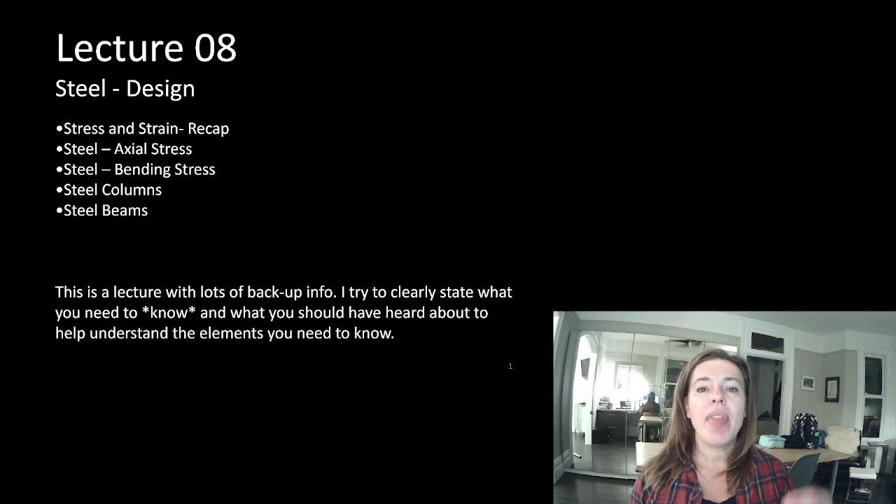It's understanding how those charts exist, or what they're telling you, that is the knowledge. But I don't want to make you do the math, because for every little number on these pages and pages of charts there are pages of calculations. I don't want you to have to do pages of calculations to get an answer. So I have a compromise: I'll do all the hard work for you. You'll listen, try to get a general feel of what I'm talking about, and then I'll let you use the charts. But I need you to at least try to focus on getting a feel for what I'm saying. So you don't have to do too much work in this lecture, but I want you to pay attention to what I'm saying.

By the end of today's lecture, we'll have answers. It'll only be for steel, but we will know if we have a properly designed member that works for our loads. Do we have a member that has a reduced capacity greater than the factored load applied to the element?

Which is exciting — you're going to be able to do the job of an engineer now. You'll be able to say something works. Last week we learned sizing guidelines, which means it's probably going to be pretty close to the answer, but we'll see towards the end of the lecture that it's a good place to start. We will have drawn something on the drawings that leaves us hopefully a buffer, but what we don't want is to find out that we actually need a bigger member than we gave allowance for on the drawings.

Hold on a second, sorry about that. We have the weirdest house with odd mirrors that show up in different spots. You just saw Dave come back from his run in his sweaty running gear, so I paused it so the poor man could get stuff out of his closet, which is the front foyer of the addition of our house, because it's a bonkers weird house. The weird window you can see in front of me is actually the original house's main part looking into the addition, so there are weird optical illusions in this house all the time.

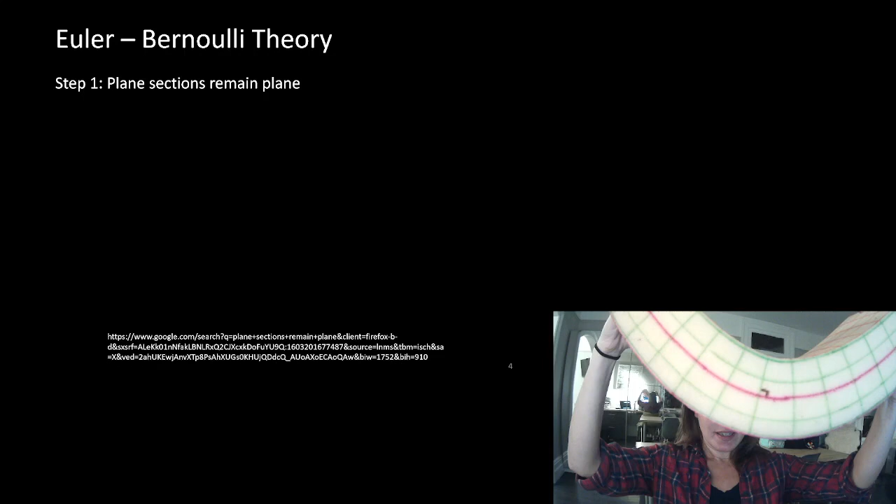Okay, so we've got our member here, and when we bend it, you can see that these lines stay straight. They don't curve. This line curves, but this line didn't. As we bent it, it compressed at the top and stretched at the bottom, but by the same amount. So that plane section remained straight, and relative to this neutral axis that is curving, it stayed at 90 degrees. How can that be?

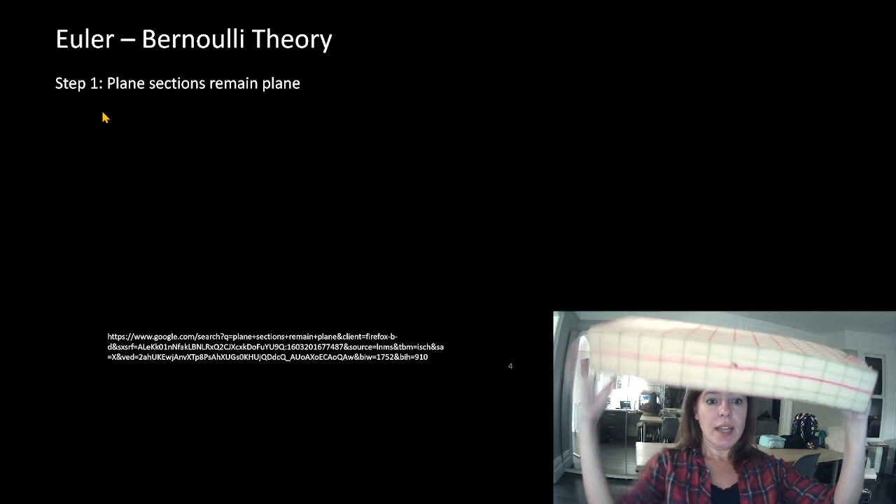How can all of these planes that are staying straight be perpendicular to a curved element? Well, essentially we're turning it into a circle. At any one of those infinitesimal microscopic plane intersections to this neutral axis, we still have 90 degrees. I know, it seems crazy, but this is where calculus comes into play.

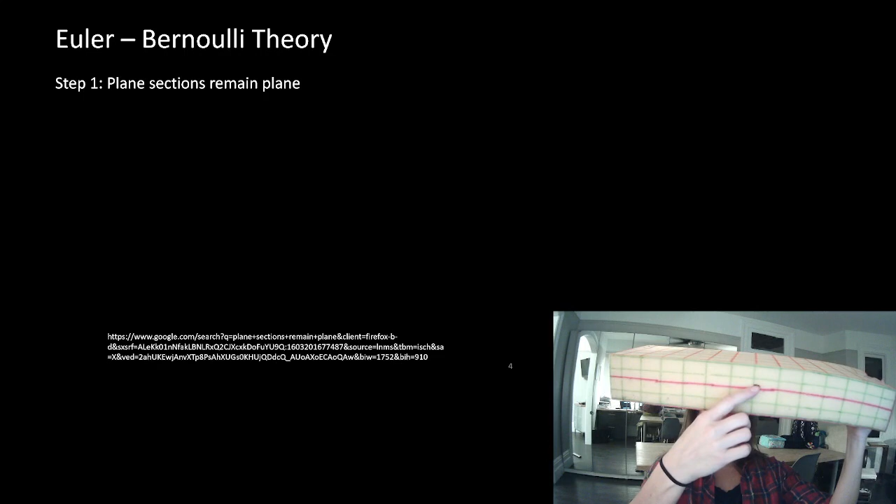We are talking about one infinitesimal plane. We're not talking about the whole length of the neutral axis, just that one plane. You can see when we bend this, the 90 degrees stays the same. It distorts a little bit because this line is moving, but if I could draw my 90 degree mark even smaller, we would see that it wouldn't distort.

So, premise number 1: plane sections remain plane. That 90 degrees stays the same. Here's our neutral axis, here's our plane section, and that stays at 90 degrees. For beam-like elements, transverse cross-sections perpendicular to the neutral axis remain plane and perpendicular to the neutral axis. We keep it at 90 degrees.

Step 2: for a plane section to remain plane, the strain must be varying linearly with the distance from the neutral axis. So, if this is bending, we know that it squashed here and stretched here, but stayed at 90 degrees to the neutral axis.

Coffee? I would absolutely adore a coffee. Thank you. I forgot to turn the dishwasher on last night. No.

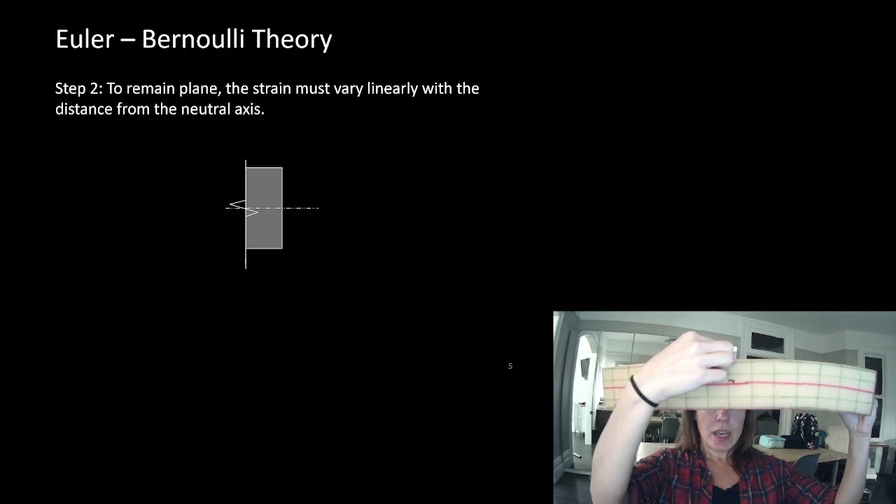So if we're squashing here and stretching here, but staying at 90 degrees to the neutral axis, we're getting some sort of movement here—compression here and stretching here. We know that we can quantify that as strain. We knew where it was originally, and we can measure how far it's moved. We're saying that the strain is varying linearly as you get away from the neutral axis. So the amount it's squashing goes from 0 to some big amount, and the amount it's stretching goes from 0 to some big amount, and that increase is linear.

So let's look at that. We have our maximum strain here and strain here.

Remember, it didn't matter if it was positive or negative - it was how much it deformed divided by its original position. So we have some amount of strain here and some amount there. We know that at 90 degrees, we have no strain right here. So that means we have a straight line for the strain.

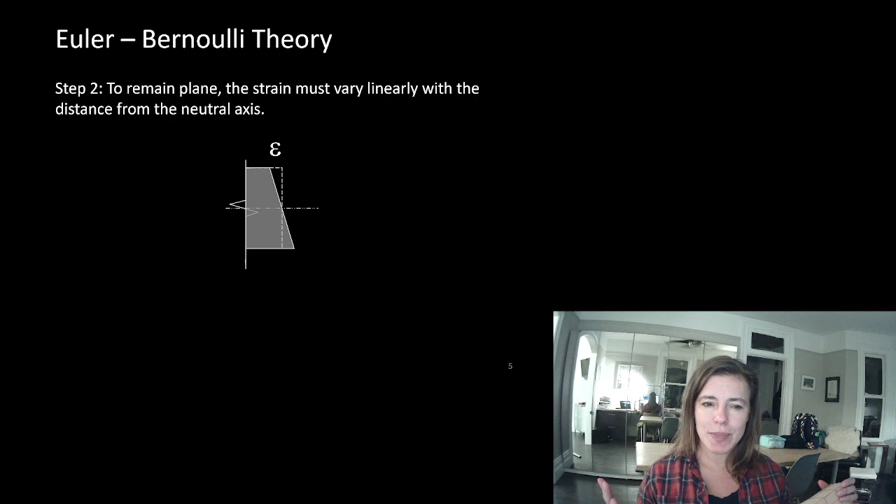Does strain have a relationship to anything else? Yes, especially for steel - it has a great relationship to stress. So we can measure the strain visibly, and then calculate the stress, because the relationship between stress and strain is linear through the modulus of elasticity. So if plane sections remain plane, the strain varies linearly, and since stress and strain are linearly related, the relationship of stress away from the neutral axis is also linear.

So as we bend this, we get maximum stress here where it squashes and stretches. We have the same stress top and bottom, varying linearly with zero stress at the neutral axis. This was our strain, and this is our stress - maximum stress here and here, and no stress right here.

If what we care about is not making this part of the element fail, we don't want to go over our reduced capacity. We want to make sure this part never hits 350 MPa - remember, that's the yield stress of steel. If it goes beyond 350 MPa, we'll have permanent deformation, and we don't want that. We don't like permanent deformation.

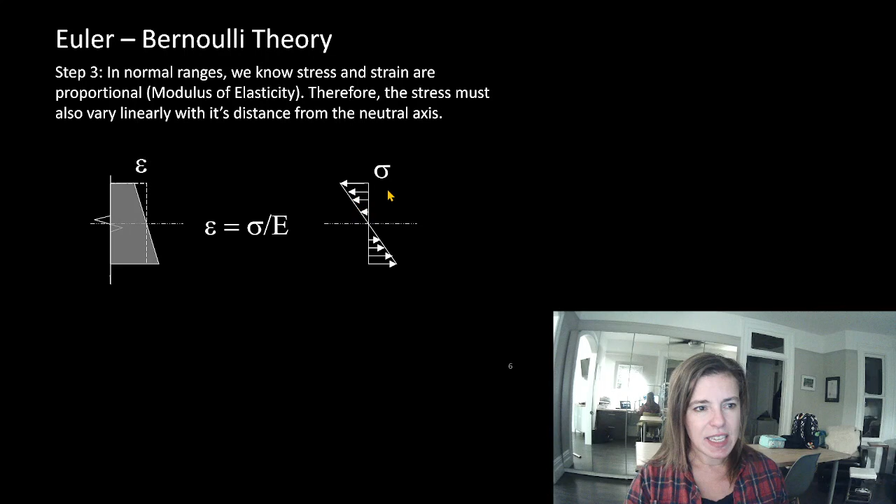Now, if we know this is the stress profile and we want this part not to hit its maximum, maybe we can do something with this. You can see here I've just taken this and redrawn it with a triangle - it's still the same triangle, I've just drawn it on the other side.

So the Euler-Bernoulli theory - if we look at a rectangle in bending, just as it starts to yield at the extreme fibers, we would have a stress profile that looks like this. This is our element that we're bending. This is what's on the face of this plane right here, and we're saying we're going to bend this object and cut a plane through here.

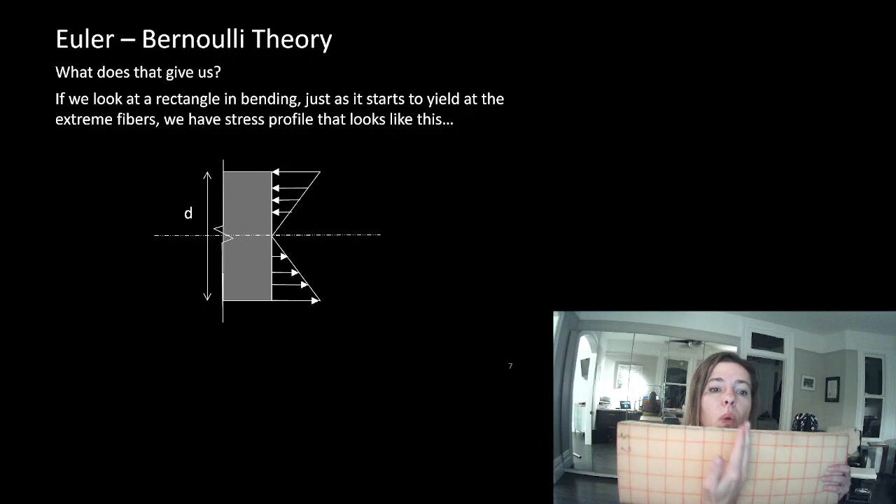This line right here is like we cut this beam and we're going to look at what's happening with the stress right here, just as if we started to bend it and are just about to reach the maximum loads at the top and bottom.

If you were in my graduate course, we would have to derive this process where we look at what that stress profile shape looks like. We sum the moments and forces on the top and bottom of the neutral axis, and we develop a moment equation. Essentially, what it says...

is that we have this equation with B and D in it. B is the width of our element and D is the depth of our element, and it tells us that the moment is equal to our stress times B D squared divided by 6.

Well, B and D are 100% dependent on the shape of our cross-section. So what does it look like in that cross-sectional profile? We're saying B times D squared is our shape property to solve for moment. So moment equals stress times some shape property - we'll use S as a placeholder, a bending shape property. For a rectangle, in elastic bending, that is BD squared divided by 6.

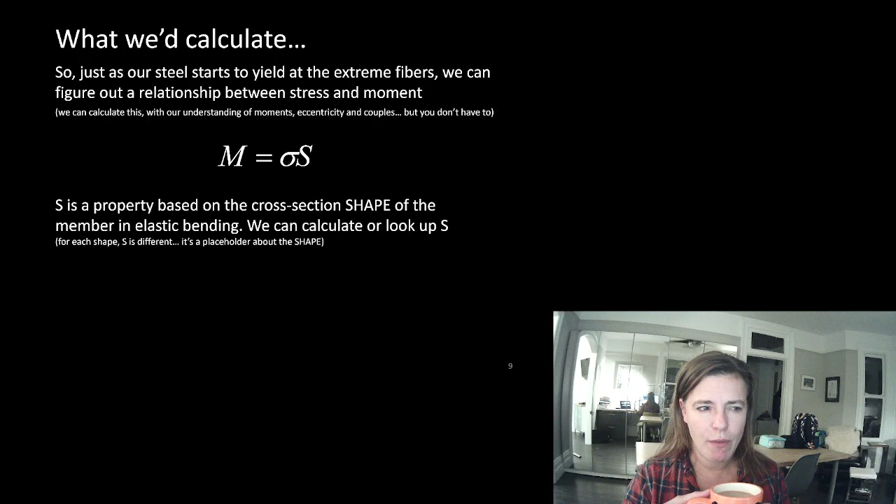That seems crazy - why would I let us go into plastic bending if we don't like permanent deformation? All right, let's think about that now.

But the cool thing here is we know that we don't want this to go over 350 MPa. Moment is dependent on the loads on the element, and S is a shape property of our section. And we're picking our section.

So we could possibly figure out what capacity this element has. We know its shape, which means we can figure out its shape property, and we know what the maximum steel capacity is. That would give us the maximum moment capacity of our element. So if we knew what our factored load was, or our factored moment, if we put a reduction factor on this, we would know our reduced moment capacity, and we could tell if it was greater than our factored moment on the element.

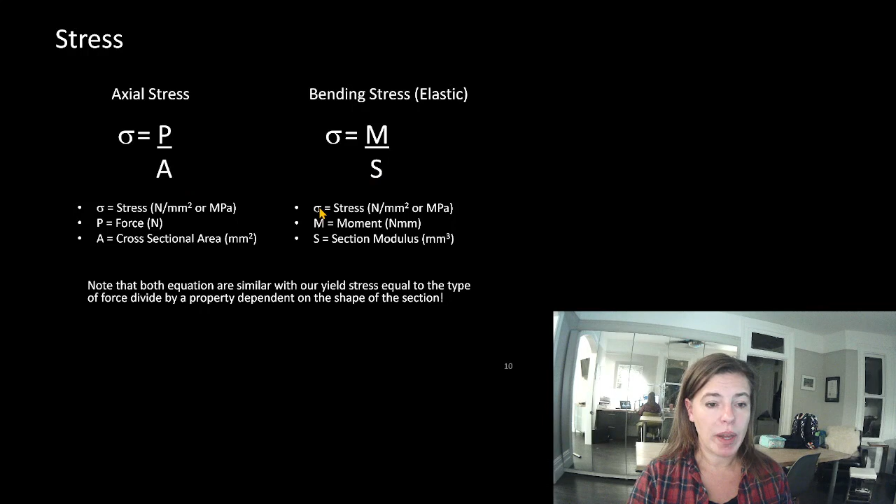Well, look at stress. Remember, we wrote stress as force divided by area? Well, we can rewrite that moment equation as stress equals moment divided by shape property S. They're the exact same. Stress, which we know for steel is 350 MPa for yielding. Force type, shape property. So both of these follow a very similar equation setup.

Okay, this one always throws people off because it really only applies to ductile members. I wouldn't even do it in this lecture, except it's the best place for it because we're talking about steel, but it isn't a thing that applies to our other materials. Concrete is brittle and wood is brittle. So this second part doesn't apply at all in the least bit to those materials.

We said that we want to limit the stress at the top and bottom fiber to just when it starts to yield. We'll let it go right to that point, but beyond that, we'll have permanent deformation, which is true. But do you remember in that stress strain curve, when you were getting permanent deformation, you weren't increasing the stress at all. What if just a little bit we allowed it to have some small amount of permanent deformation all the way until we got our maximum stress all the way down here?

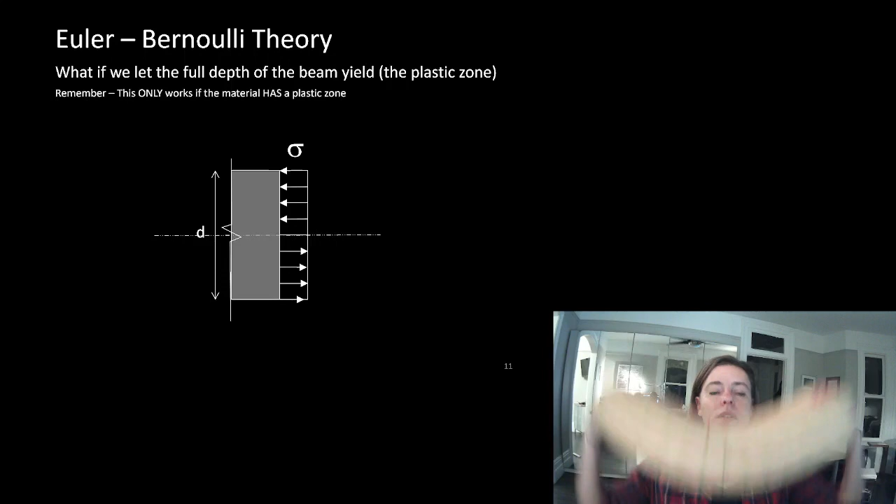So remember that thing, plane sections remain plane? Well, that's true until it starts to yield. Remember our stress strain curve looks different? So we're saying, okay, at the top and at the bottom, we'll allow some small amount of permanent deformation, and now we'll allow the stress, the maximum stress, to come all the way down to the neutral axis. Beyond that, and we definitely failed this member.

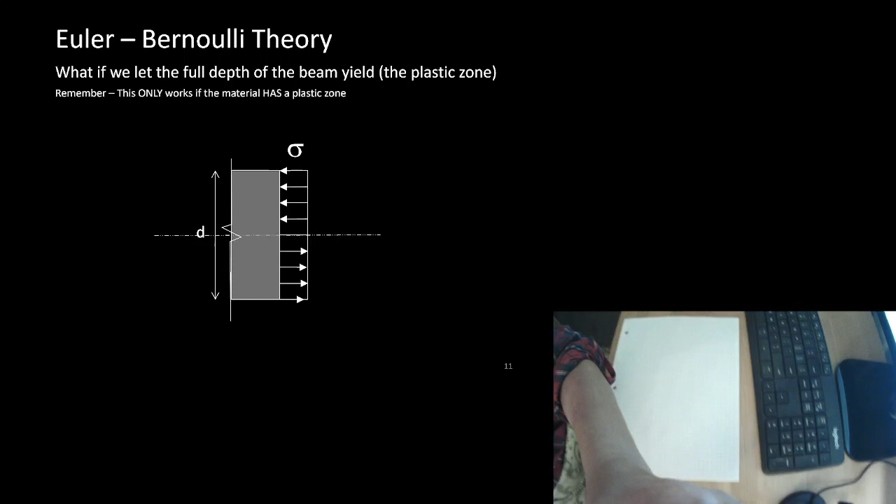But what we're saying, and when I'm doing this in real time, I'll often redraw this stress profile. Let me, it's dark in here, so I don't know how well this will show up. What I often do in my grad course is when we do this, I draw the stress profile. I'm going to draw it on the other side just because I find people understand it better.

Okay, we're limiting this to our maximum stress, top and bottom. Well, we're going to say that we'll allow it to have some amount of permanent deformation. Maybe we come down like this a little bit. Oh, I went a bit further with that one. And then that becomes our linear elastic zone.

So right here, we're getting some permanent deformation, but we still have zero stress down here at the neutral axis. And then we say, okay, we'll let ourselves go even just a little bit farther, just the tiniest little bit. I just want to, sorry, I've been drawing those arrows backwards. I wasn't even thinking. These are going in opposite directions.

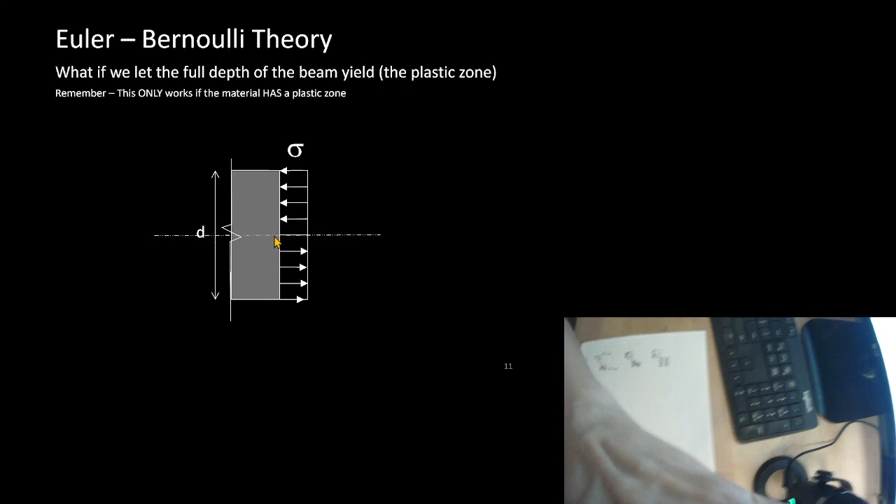We're going to let this now come just down to the neutral axis. So this is just a redrawing. That is just a redrawing of this. So we're letting our maximum stress come all the way down to the neutral axis. We don't want to go beyond that, or else we're going to have a lot of permanent deformation throughout the entire member. But we'll say we'll let just a tiny little bit of permanent deformation happen, just as we get that maximum stress or that yield stress down to our neutral axes.

So if we did the same thing I did before, that thing you don't have to do, where I look at what that stress profile looks like as a block, and I look at the internal forces and rewrite it as a force and a moment, because we know about couples, then I can go through and figure out that the moment equals the stress times the width, b, times the depth, d squared, but divided by 4.

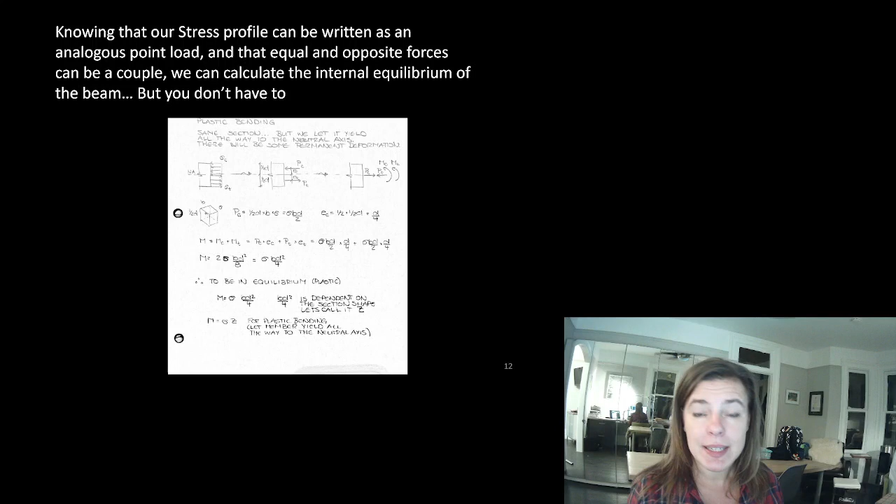So it's just a different shape property. Before we had S. Now if we let it yield down to the neutral axis, we say okay, we'll let it go past the extreme fiber, we can use a different shape property called Z. Z lets us get a little bit more out of our steel beams and columns because it has the ability to yield, and it has a very large plastic zone. Wood and concrete, we can't make use of Z because it doesn't exist. It has a brittle failure mode.

So both equations are still similar with our yield stress equal to the type of force divided by a property dependent on the shape of the section. This one just lets us make a little bit more use of the fact of our steel because we know it has a huge plastic zone, and we're only going to touch the tiniest little bit of it.

I thought I heard a kid, but I do not. It's the heat coming on.

There is another thing that we can calculate looking at this Euler-Bernoulli strain beam theory. Remember, I just briefly touched on strain simply because it allowed us to talk about stress because we knew those had a linear relationship. Well, if we talk about the strain itself, we know that this angle can be calculated based on how much strain we have here. With that, we can go through all kinds of stuff, which actually involves a double integration. Don't worry, not even close to what we're going to do. But I am going to tell you that it allows us to calculate what that angular strain is as a relationship to the moment. And that angular strain is moment divided by EI.

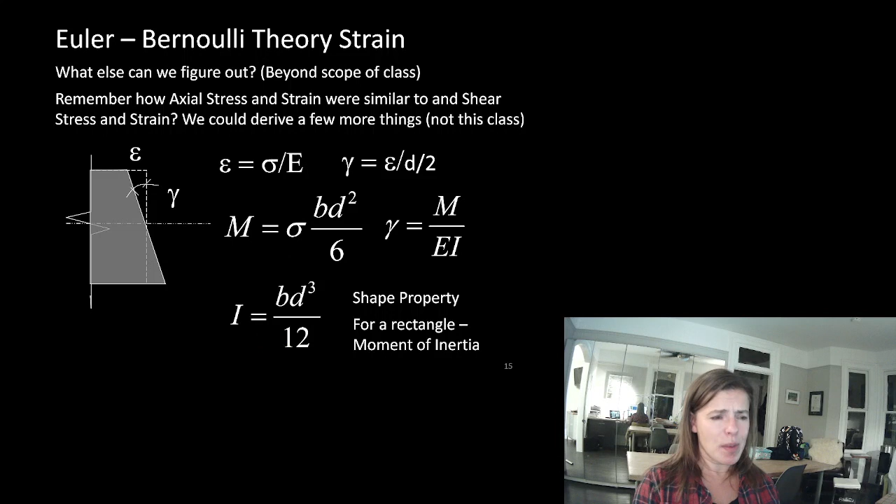All right, I'm just going to show you those slides that I said you don't have to worry about. Start with angular strain, we can integrate, we can get the rotation at any point, we can integrate again, and we can get deflection. Now, you do not have to do this - in no way am I even showing you the calculations for this. But the deflection of a beam, so if this is our beam and bending, and we've deflected it, the amount of deflection that we got there at the middle, the amount of this deflection right here is equal to...

...5 times W, which is our linear load on our beam. Now this is just for a simply supported beam with a uniformly distributed load on it. Do you remember way back when I said that was like the most common type of beam we'd ever seen? So W is our load, L is the length. Why they write length of beam in a lowercase for deflection when everything else in the world they write it as a capital has always bothered me. Don't you find that they always write deflection L as a lowercase l? So it kind of looks like it's not L. Anyway, this is the length of our beam to the power of 4, divided by 384 EI.

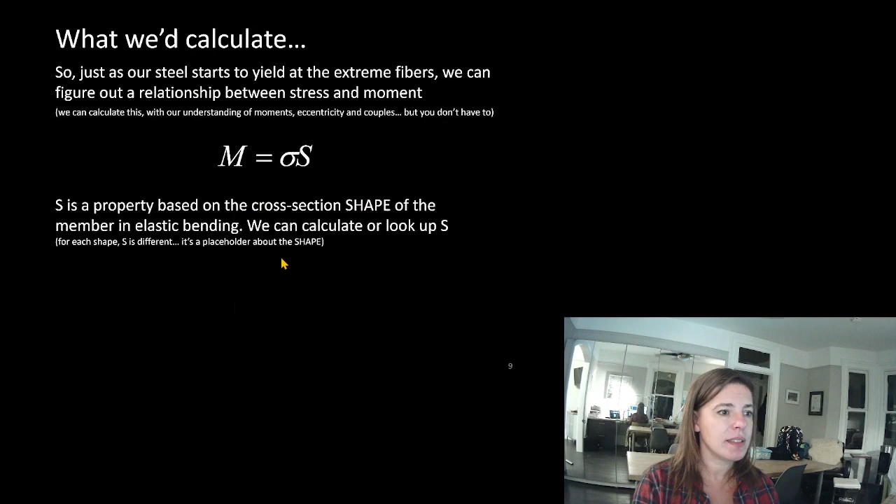So, do you remember axial strain could be delta L equals PL divided by EA? Remember that way back when we were talking about axial stresses and strains? When we knew that E equaled modulus of elasticity, let's go back here for a sec. Let's see how far back we have to go. Just want to bring you back to this slide. Remember, E equals stress divided by strain, stress equals force divided by area, strain equals change in length divided by original length. We could plug P/A in for stress, delta L divided by L for strain, and we could rearrange it, and we got delta L, where our change in length equals our force times our length divided by our modulus of elasticity divided by A.

A is a shape property. We don't talk about it that way very often, but A is a shape property. Let's come way back down.

Well, this is our axial strain, and this is our bending strain. This is our deflection at the midpoint of our simply supported beam. The delta L was axial force, so we're talking about deformation, force. It's just a particular, we're just writing it a slightly different way. Length, E, shape property. So even though they look very different, this one has a bunch of constants in it, they're really fundamentally coming from the same place, these two equations. Both talk about deformation, both have a load applied to them, both involve the length, both involve the modulus of elasticity, and then both involve a shape property of the member.

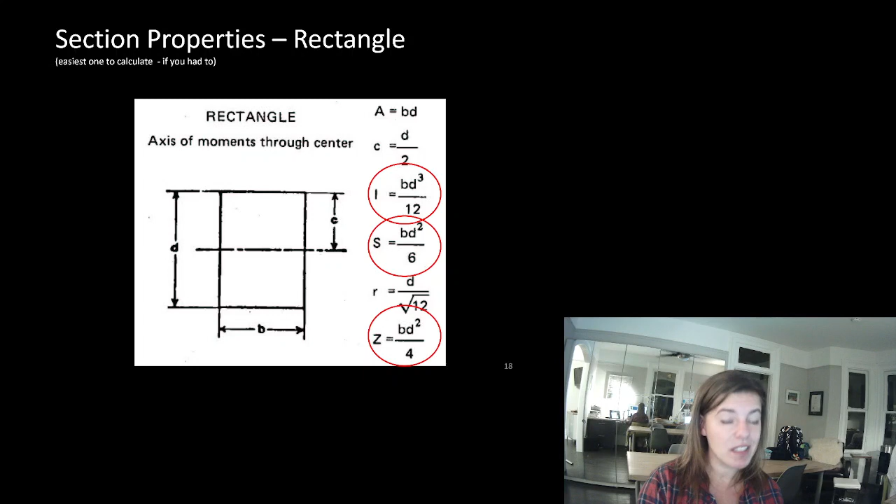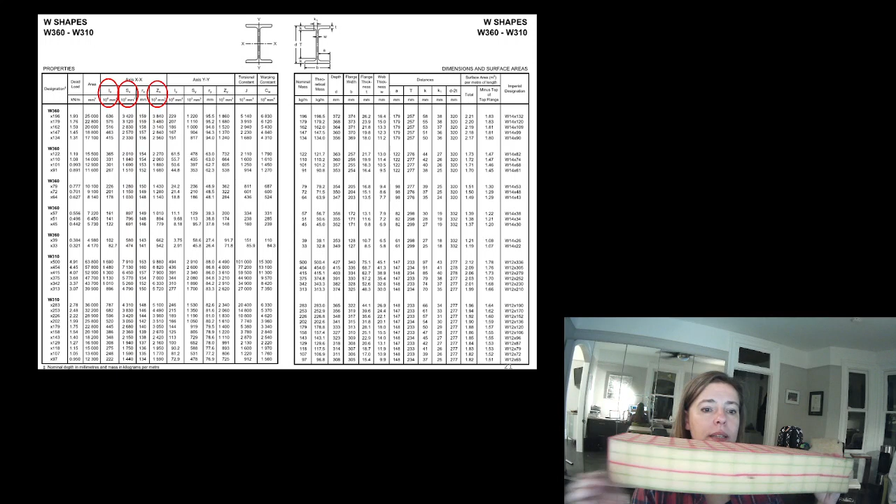So if this is my cross section, and in this one I've got B and D, if this is my beam in bending, you can see we're talking about moment about some axes here. We're saying we're talking about moment about this line in the element. It's internal axes like this, so we're talking about moment about this line. Remember, if we curled our thumbs, we're talking about it going around this x-axis.

If we had something, so this would be our strong axes bending. What if we had something bending sideways like that? Well, if we had something bending sideways, we might want to know those shape properties about this axis, because now we're talking about it bending in this direction.

So for that, we would want to talk about it spinning about this axis. Remember my thumb, this is the moment being applied to it, my thumb is the axis. They call this the internal y-axis of an element. So x-axis, y-axis. Bending in this direction, we're talking about the x-axis. Bending like this, we're talking about the y-axis.

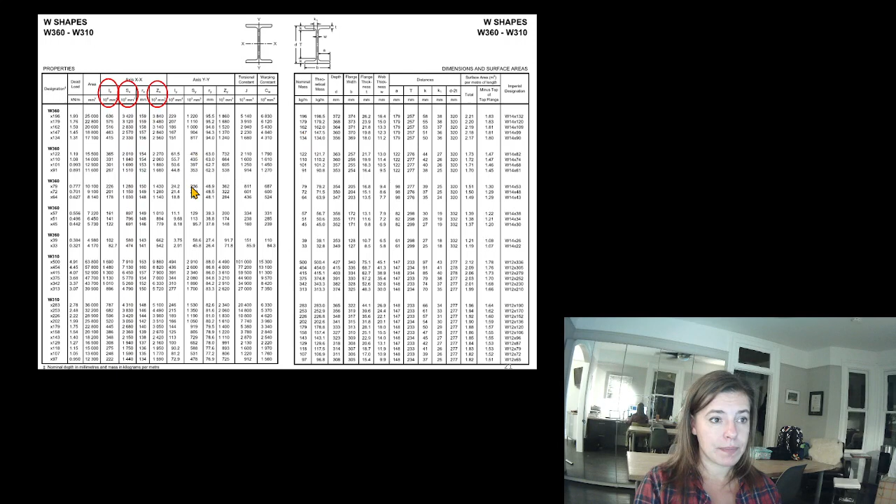Well, if you guys remember, we looked at those loading diagrams for different beams way back when. We had where you could calculate R and V and M. Well, they also had one for deflection, and within it, they had the shape property I.

You don't need to memorize it, you can look it up in the chart, but I tell you, I plug that into a calculator all the time. Even though I have fancy design software that does all kinds of them for me, sometimes it's easier to just plug it into my calculator and double check it.

You guys though have access to this diagram right here, so you know that you can calculate I or figure out I for any given shape. You can look it up. You know the length of the member is how long it is, and you know W is the load.

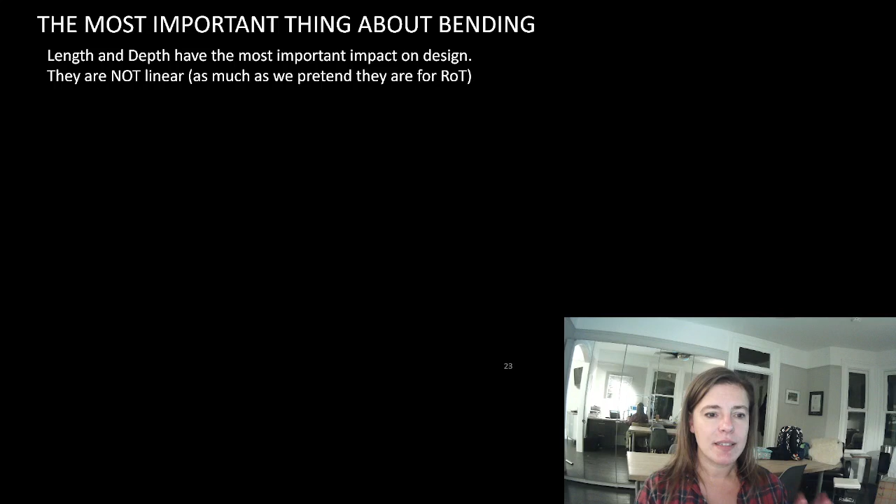And that is a linear relationship. Remember I said that's great if we're talking about a small range of narrow, normal applications. I said that this week we would find out that in truth they are not linearly related. This is what we have done. We have just talked about this.

So, length for the load, for the life safety, M equals WL squared divided by 8. That square is not linear. As something gets longer, there's more and more moment, and it is not a linear relationship to the load. So load is linear—double the load, double the moment. But double the length, you square the length's increase in the moment. So it's not a linear relationship.

Deflection: look at length written in the deflection equation. It's to the power of 4. It has a huge impact on deflection. So if you increase the length, it's not a linear impact on the deflection—it's a to-the-4th-power impact on deflection. So L squared for strength, L to the 4th for serviceability.

Depth. Now, I'm using the example of a rectangle in cross-section, but these constants tend to hold true no matter what. So BD squared divided by 6 for strength. B is the width, and it's linear. Depth of our cross-section is squared—it is not linear. So if you deepen your member, you don't have a linear increase in your section property. You have a squared impact on your section property.

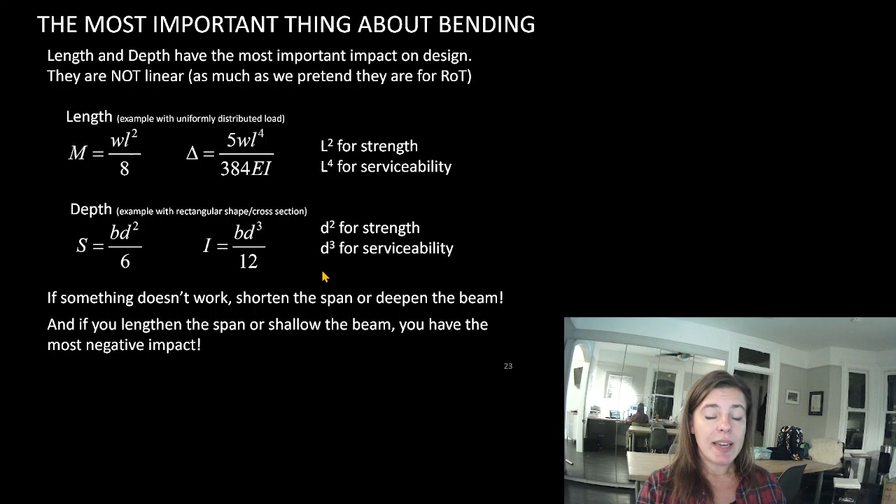Depth: if we have a beam that doesn't work, well, maybe we can't change the length—that's set, our grid lines are set. We could deepen our beam. And if it's overstressed by 2, we don't have to double the depth, because we have a squared increase in our capacity due to depth. So whether it's length or depth, we have an impact on strength and serviceability.

So remember our old friend, this equation. Let's jump to the next part. We want our reduced capacity to be greater than the factored load. If we see the subscript F, we're talking about factored, and if we see the subscript R, we know we have our reduced capacity. For serviceability, we're not going to do this, and we're not going to do this, because that's not about life safety—that's not strength.

We talked about our steel properties last week—let's brush them up a little bit. Fy is 350 if it's an HSS or a cold formed section, 345 if it's a hot rolled section. What's Fy? Fy is just that maximum yield stress on our stress-strain curve. If what we care about is not exceeding this limit, who cares if we're at 250? Great, it works—we're not going to check it against 250. We want to make sure we don't exceed these values. These are the values we care about. If we're less than that, we're fine—we're in a zone that works. If we go over these elements, that's when we have a problem.

I've talked a lot about reduction factors or reducing the capacity. Here are the steel reduction factors. For normal steel, whether we're talking about a column or a beam, we're going to reduce our capacity by 10%—we're going to make it only 90% of its capacity. Really what we're saying is we're going to reduce 350 or 345 by 10%; we're only going to allow ourselves to use 90% of these capacities. Rebar, bolts, shear connectors and anchor rods have some slightly different values, but this is really the only one we're going to talk about right now. When we talk about concrete in a few weeks, we'll talk about rebar.

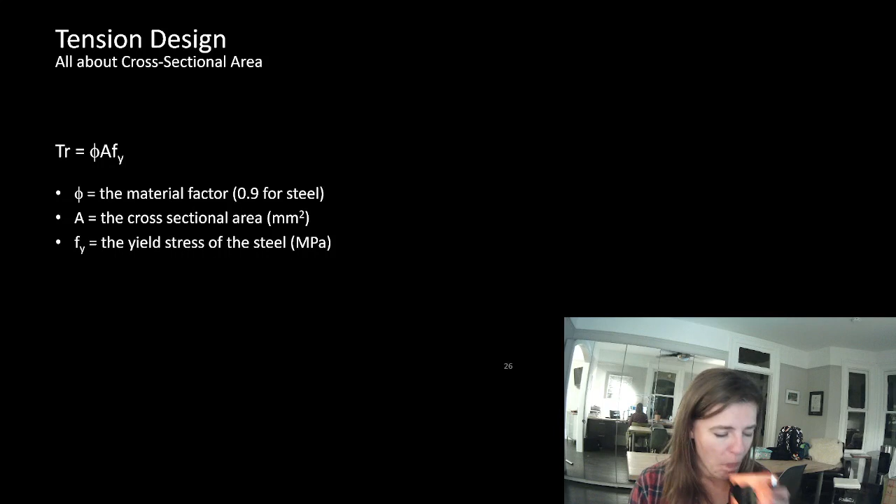Okay, let's actually do some design now. We're ready to do a calculation and start thinking if these things work or not. I'm going to show you how to use a chart to do the work for you, but we should talk about where these charts come from.

Tension is pretty easy. Steel behaves nicely in tension, and we don't see weird things start to happen. I'll talk about those weird things when I talk about compression in a second.

Tension design is all about the cross-sectional area. TR, the reduced tensile capacity—this R means I'm talking about a reduced capacity, so there's my reduction factor. I get to put my little subscript R here because I have this reduction factor in it. TR equals our reduction factor times the cross-sectional area times Fy. Remember, Fy is the maximum stress I want to let my object see.

We know for steel that we want to reduce the capacity by 10%, only 90% of it, and we know A is the cross-sectional area. So for any given member, we can calculate the reduced tensile capacity of it.

Compression's harder. Let's talk about why. I've got this beautiful column here. If I stretch on it, you can see that there's some deformation, and it's easy to understand that if I had bigger hands or I could apply the load better, you could see that it would be evenly distributed across the cross-sectional area of a column.

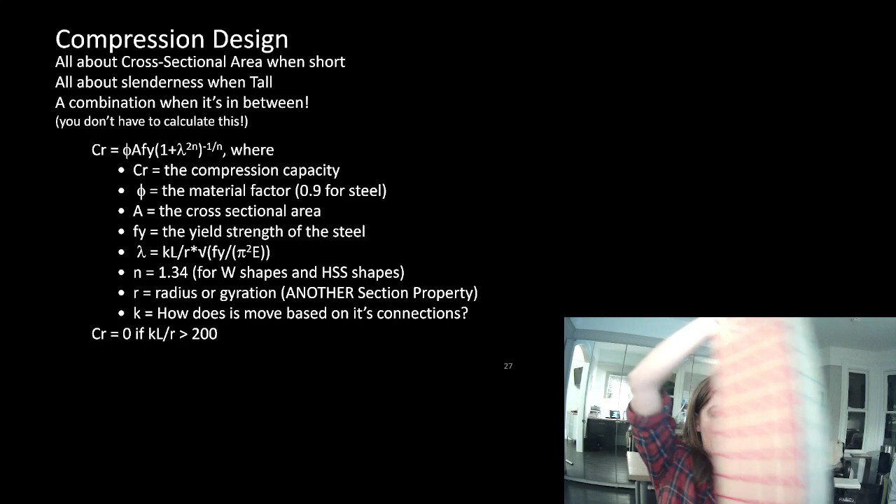Okay, what happens when I try to squash this column? That doesn't seem like it has anything to do with how strong the material is, because it doesn't. It has to do with its slenderness, or the fact that it wants to buckle. So a column isn't just dependent on its cross-sectional area—it is dependent on its ratio of length to cross-sectional area.

And there's two directions that this could happen. Now it's a lot harder to do it in the other direction. So compression design has two components to it: is the material strong enough to take that compression load? No problem, we know that. I just want to block all this out. We're left with reduction factor, A, Fy.

So Cr is the reduced compression capacity of our element. If you ignore whatever this weird stuff is, this looks exactly like our tensile capacity—the equations look the same. But that just has to do with the material strength of our element.

We need to think about how we talk about buckling. Because look at this—if I make this really short, it doesn't try to buckle anymore, it just tries to squash. And that is this part of the equation. Make it really short and it's trying to squash. Great, we've got that right there. We know that's all about the cross-sectional area.

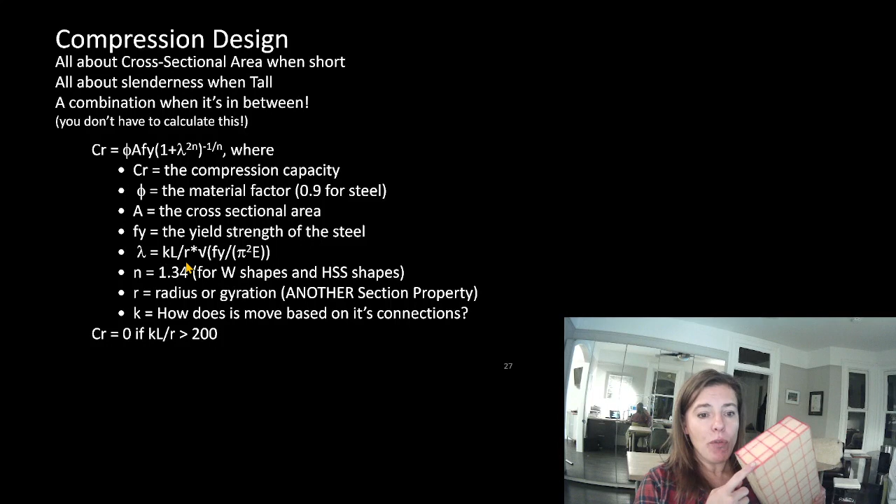I know, a pain in the butt. Well, R is another section property—if you looked at those steel shape properties, we had something called R in there as well. We're not going to worry about it, you're not going to calculate it, but this is all about its ratio of length to its cross-sectional area, essentially. R is really saying how far away is the worst point from the center of our column, because that's going to tell us its ability to resist buckling.

So lambda is really just this ratio of how long is it to how big is our element. Really, you can call this your slenderness ratio if you'd like.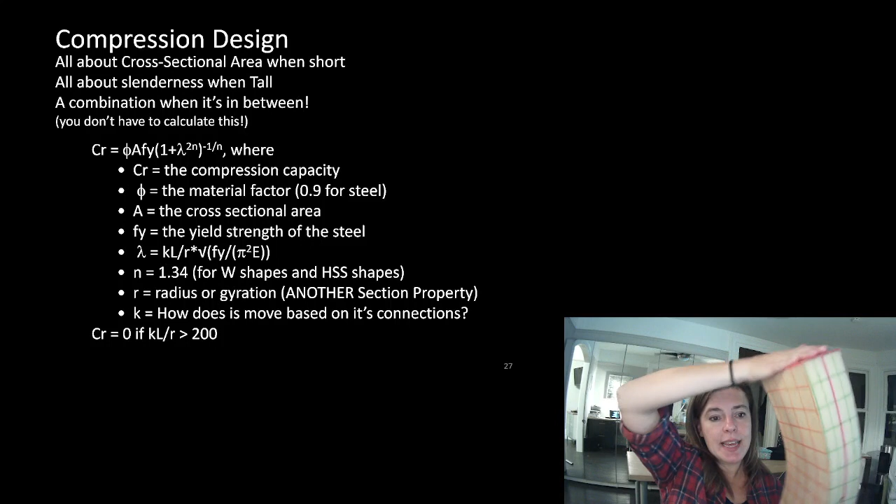K is really just saying what our member looks like, or how it's trying to buckle. So this, you can see, is buckling by allowing it to rotate at the edge. See how this flat plane has rotated?

It doesn't stay at 90 degrees to the load being applied, and we get this buckling shape. What if I moment connected the top and the bottom, but still tried to put that load on it? Look at the shape of how it's buckling now. You can see the top, it's hard because it's a foam block, but the top is more perpendicular to my hand, as is the bottom. It's actually hurting my arms to do this because it's a lot harder to buckle it, because by moment connecting it, it is similar to having a shorter length member.

So K is how it moves based on its connections, or its kind of connection factor, if you want to think of it that way.

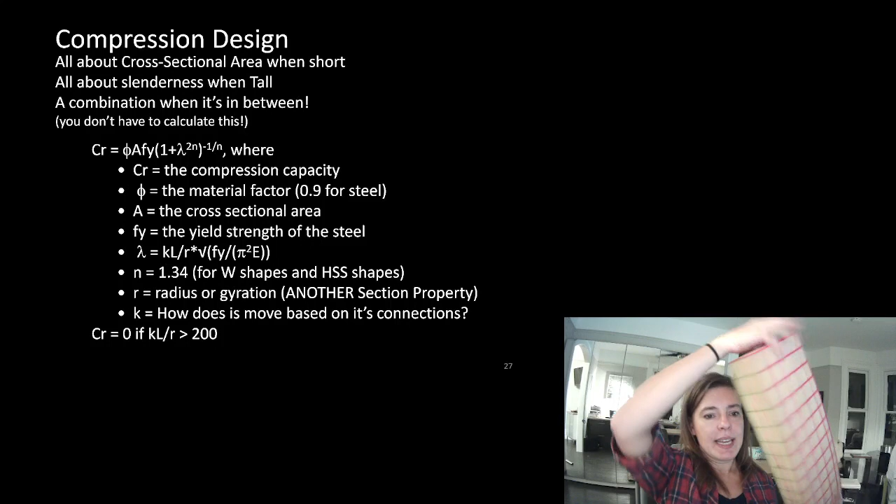We also say that we don't care what load it can take, even if it says it doesn't buckle. If this was several of these stacked high, it could take some amount of load before it buckled. But when it gets so slender relative to its height, we say the smallest load could make that buckle, and we don't want to take that risk. So at that point, it has zero capacity. If that length relative to its slenderness or its cross-sectional area is greater than 200, we don't care.

I feel like I hear an alarm going off. I'm hearing things.

So we're saying that we don't care if it can take a little bit of load. It doesn't matter, full stop. It is too slender to even reliably take any load.

So here is that effective length. Here's that drawing that I told you. This is what we say most of the time it looks like, and it's got a factor of 1. That's what you're going to do, it's always going to be 1. In fact, you're not even going to calculate this, so it almost doesn't even matter. But I want you to see where it comes from.

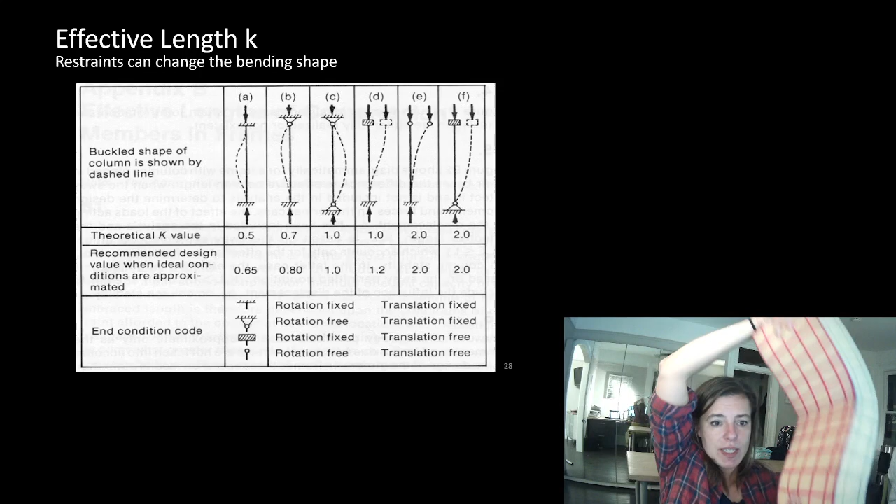And then with a column, you can see if we grab the ends and moment connect it. Remember, this is what our moment connection symbol looks like. Here's a pin, here's a moment connection. We can see it's kind of like this is the length of the element. We've shortened the length of our member.

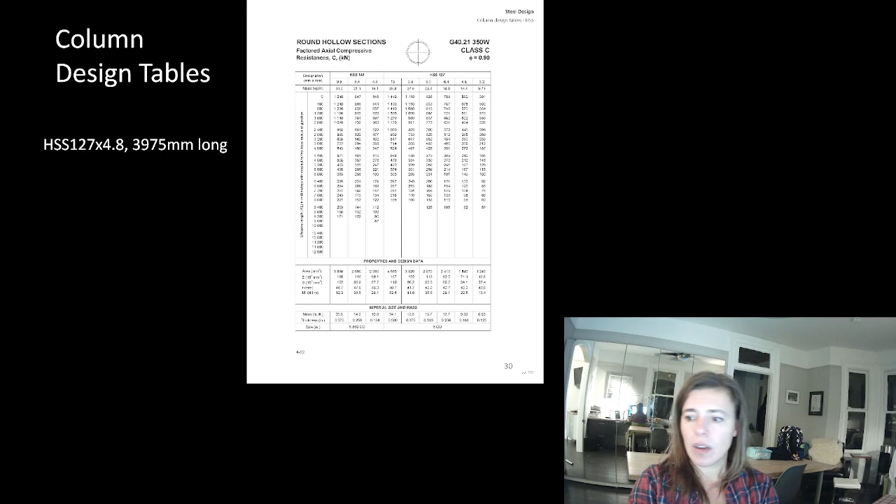Let me bring up the page for you guys. All right, so I've posted for you guys a series of steel column tables. It's all in one PDF.

Let's find our HSS 127 by 4.8. All right, we've got a round HSS 127 by designation 4.8. So there we go, oh look at this - 350W steel, reduction factor 0.9. So they've told us that they've incorporated the reduction factor in this, the factored axial compressive resistance, CR. They've told us they've used the reduction factor, and they've even let us know what reduction factor they used.

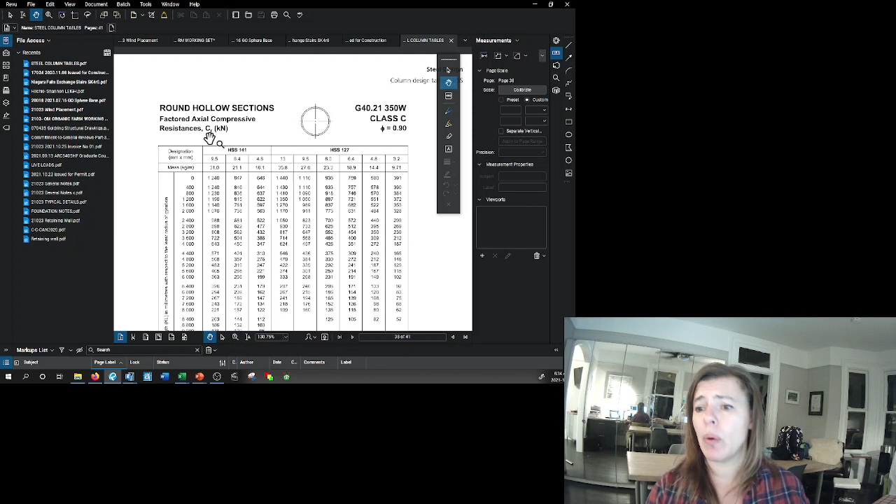So this CR tells us we're talking about reduced capacities, and we can now compare this to the factored load on our element. HSS 127 by 4.8, and they asked us to check it at just shy of 4 meters. Ooh, look at this - effective length KL in millimeters with respect to the least radius of gyration. So they've told us they've thought about R, remember R was the radius of gyration, and KL was that slenderness, kind of shape movement of how it would deform. For us, most of the time it's going to be 1. But they're telling us in this table that they thought about all of the things in that equation.

All right, 4.8, 4 meters - oh look at this, 272 kilonewtons. So it has a CR of 272 kilonewtons at 4 meters. We're a little bit shorter than 4 meters - does that mean our capacity would go up or down? If you shorten the column, do you increase or decrease your capacity? Well, let's take a look.

If our column was 2 meters tall, we can take 484 kilonewtons of compressive load. So if we have a column that is 3.975 meters tall, our compressive capacity would actually be a little bit greater than 272. Doesn't matter too much if our applied load is 100 kilonewtons - 272, whether at 4 meters, no problem, it works. If we shortened the column, we'd only increase our capacity, so no problem, this column works.

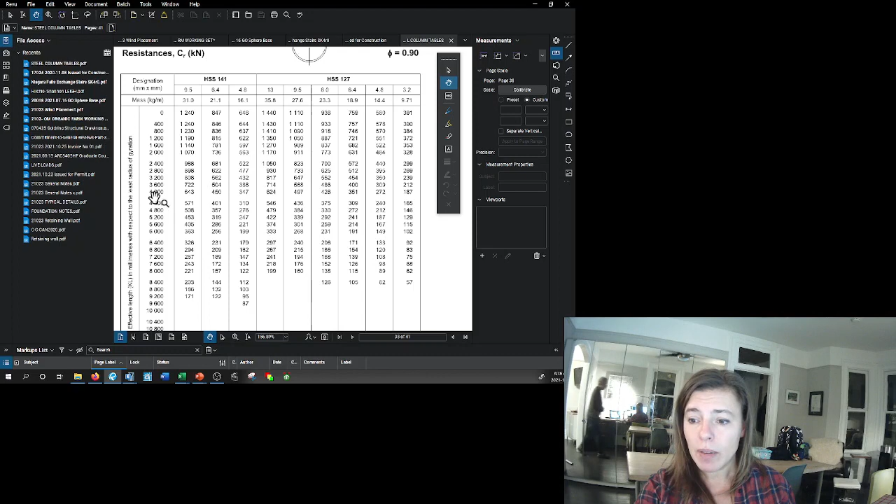What if our applied load was 272.2? We're a little bit over. Our factored load is just a little bit higher than 272, which is our compressive resistance. But we know it wasn't actually a 4 meter tall column - it was 3.975 meters tall. So we could interpolate in between 4 meters and 3.6 meters and find the capacity for our exact member.

Let's take a look at what that looks like. We can zoom in, which I just did in the PDF, and we can find that we're going to be somewhere between 309 and 272. We know we're pretty close to 4 meters, so we're going to be closer to 272 than 309. We can interpolate between those two things, and we get that our compressive capacity is 274.3 kilonewtons. So our HSS 127 by 4.8 millimeter column that is 3.975 meters tall can support 274.3 kilonewtons. If we knew what the factored load was on this element, we could say if it worked or not.

Okay, let's do a quick example and then we'll talk about bending. We're designing a steel canopy for an existing building in Brampton. The height of the canopy is to be 4 meters tall, so they're telling us how tall our columns will be. The snow load is 1.44 kPa for ULS and 1.30 kPa for SLS conditions.

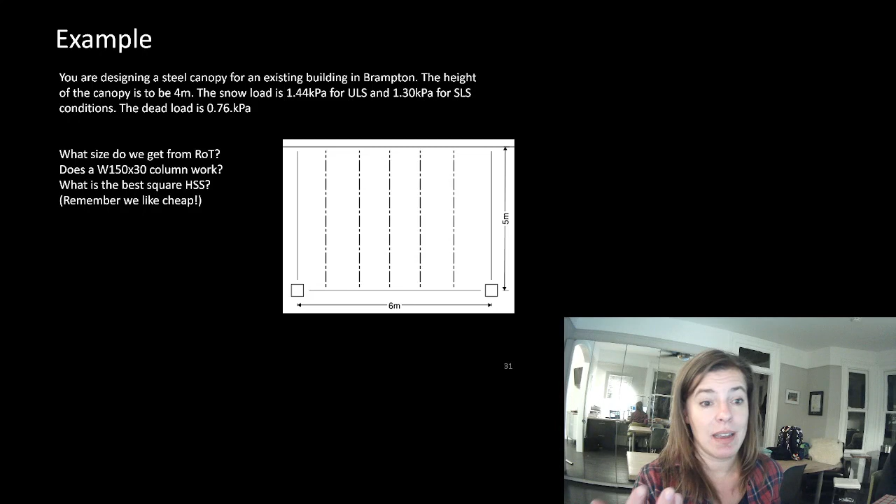We're being asked what size this column needs to be based on sizing guidelines, what we talked about last week. Then they're asking, does a W150 by 30 column work? So they've asked us explicitly to check a particular column. And in case we don't like that W section architecturally, what HSS would be the best? Remember, the best means it has to work, meet the design criteria. After that, the best means cheapest, because we want to use the least amount of steel we can - it costs less, but we could also think about it on an environmental level. We want to use less materials if we can.

So let's go through this example.

I'll pull this up. You can hear my stomach growling because again I've been up since 3 a.m. and it's 6:40 and all I've had is half a cup of coffee. Not that that's a hint or anything. Do you want the other half cup of coffee now? I wouldn't want to eat right now anyway, although you guys can probably hear my stomach growling. I am very hungry, but I want to get this done before the kids wake up because I still have to pack, get groceries, put together a kid's Halloween costume, get ready for somebody to stay in my home for 2 nights, and then head off to Winnipeg, all before 10 a.m. Okay, all right.

We know we have a column that is 4 meters tall - we've already been told this. Actually, screw it, I'm not going to do it this way - I have a way I always like to do it. This is a good time to set up the process. So, column: I always write out everything I know. So, what we know: we have a height of 4 meters. We know we have a snow load of 1.44 kPa and 1.3 kPa for ULS versus SLS.

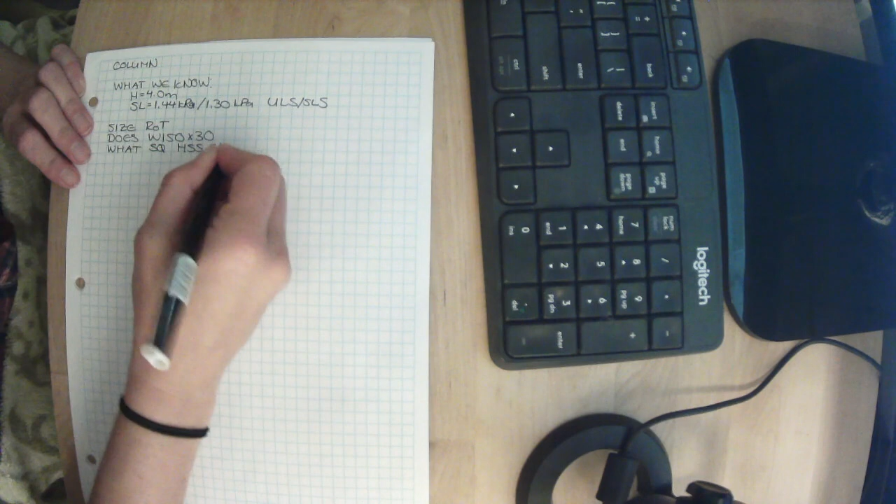Okay, let's start with the sizing guideline. The sizing guideline for a steel column is height divided by 20 equals D or W, the width of it. We have a height of 4 meters, which equals 4,000 millimeters. So W equals 4,000 divided by 20 equals 200 millimeters. Well, 200 millimeters doesn't help us all that much. If we were talking about an HSS, we would need something - well, this tells us we probably shouldn't draw a W150, because that has one side that's 150 millimeters in dimension.

But let's talk about the HSS. I would probably suggest an HSS 203 by 203. I can't be more specific than that because the thickness is irrelevant, has nothing to do with this very preliminary calculation. If I was just at a preliminary stage in this project, I would say we should be drawing a 203 by 203 HSS as a placeholder. The engineer will come along and do the design, but I don't want to draw an HSS 152 by 152 and find out I needed a 203 by 203. Maybe that was critical on how far apart we placed the columns because cars needed to pass through, or a truck needed to back up to this door. So we'd rather draw something slightly bigger at this stage than something too small, because we could get some unpleasant surprises later.

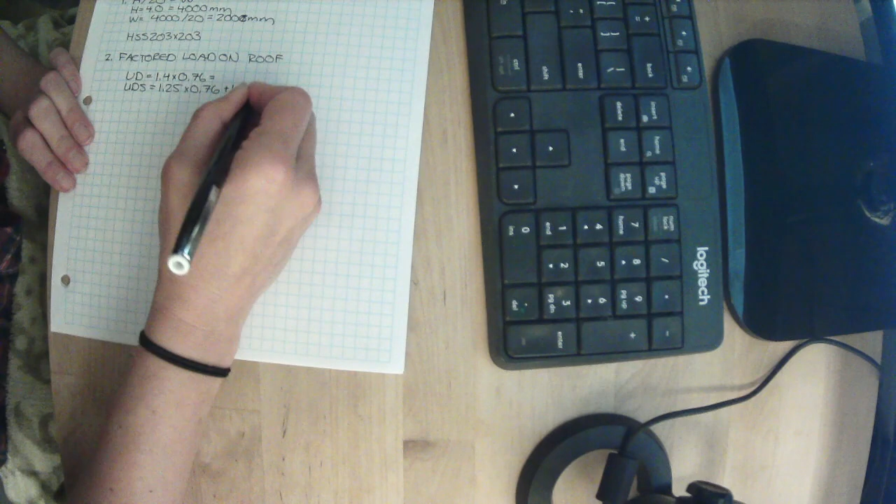So we have 1.4 times 0.76. Ultimate dead snow is 1.25 times 0.76 plus 1.5 times 1.44. We don't have a live load, we don't have any wind load. It only looks like we have dead or snow or dead and snow together. So let's calculate those. My calculator does not seem to be working very well lately, wonder if my phone will be better.

So we have 1.4 times 0.76. Our factored dead load case would be 1.06 kPa, versus 1.25 times 0.76 plus 1.5 times 1.44 equals 3.11 kPa.

Okay, so we know that this isn't the load case that governs, this one is. If it works for this, it works for this. So for all factored load cases, we're going to use 3.11 kPa. So for everything strength related, we're going to use that. But we also had to think about some serviceability load cases as well. Doesn't seem like they're asking about it much here, but it might matter when we talk about something else. So I'm going to track it right now.

So we have serviceability dead and snow together, and serviceability snow all by itself. Because we know in our deflection criteria, I think it was in the very first week, we worried about dead and snow or dead and live together, but then we worried about live or snow all on their own. They've told us they've already applied the serviceability factor to our snow load. So this would be

0.76 plus 1.3 kPa. And then this would be 1.3 kPa. So 0.76 times 1... what's wrong with my calculator, it's driving me nuts. I'm very tired. Okay, 0.76 plus 1.3 equals 2.06.

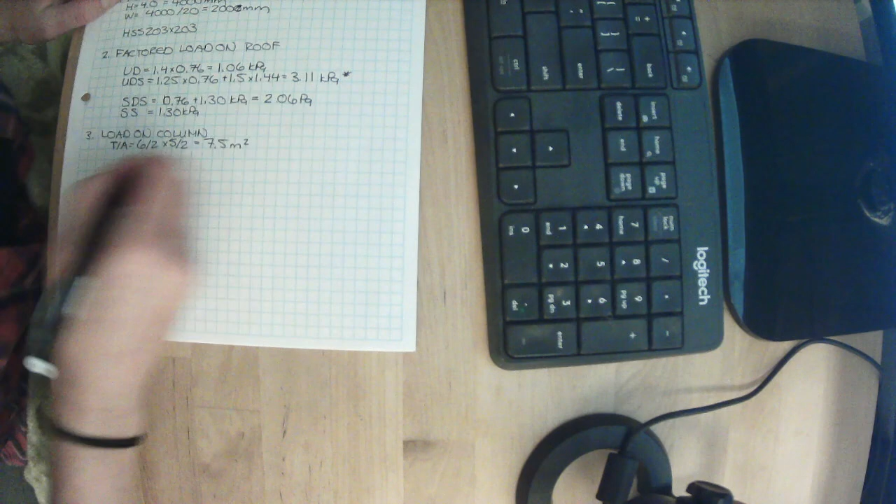So, load on column. Our tributary area is, we have 6 divided by 2 times 5 divided by 2. We plug that into a calculator. Our tributary area is 7.5 meters squared. So that means, remember, this is a factored load that we're using.

So CF, our factored compressive load on this column, is 7.5 meters squared times 3.11 kPa. If we plug 7.5 times 3.11, we get 23.3 kilonewtons. So that column is supporting 23.3 factored kilonewtons, that's what it's supporting. We need a column with a reduced compressive resistance greater than 23.3. So we need this to be less than, we need this to be less than the capacity of the column.

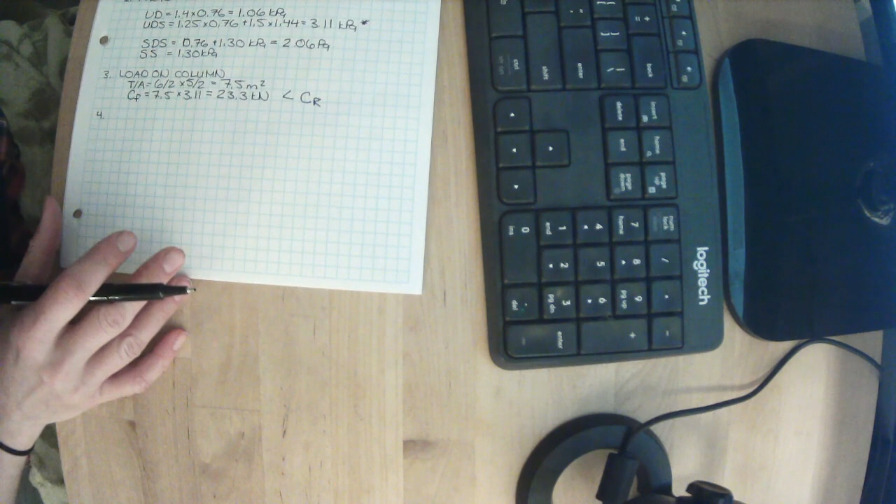So we need that to be less than CR. That's what we need, we want something that has a CR greater than this. All right, so let's check out our W150 by, what beam did they give us? By 30. For H equals 4 meters.

Let's drop this image down a little bit. Okay, so this was our HSS here.

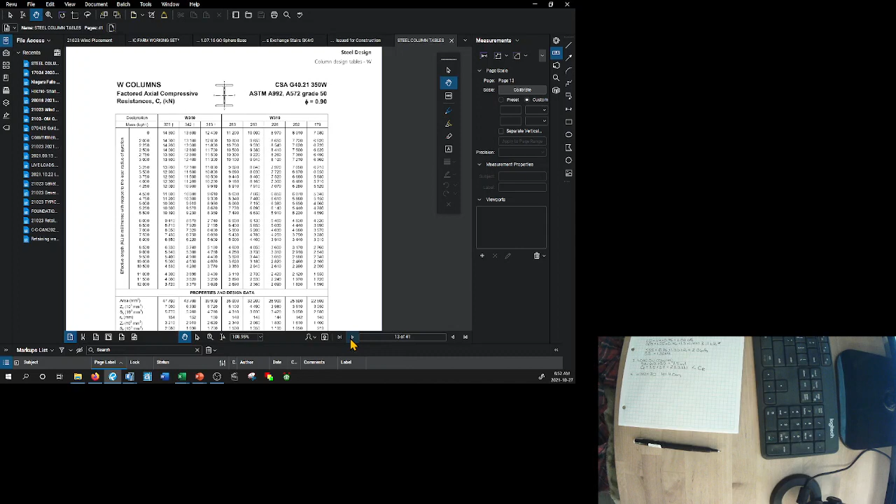Let's see if we can find the W sections in this. I'm just gonna go back a few pages. Ooh, W sections. All right, they've asked us about a W150. Let's keep going. Oh, past it, W150. So factored axial compressive resistance, CR, the reduced compressive capacity of a W150 by 30.

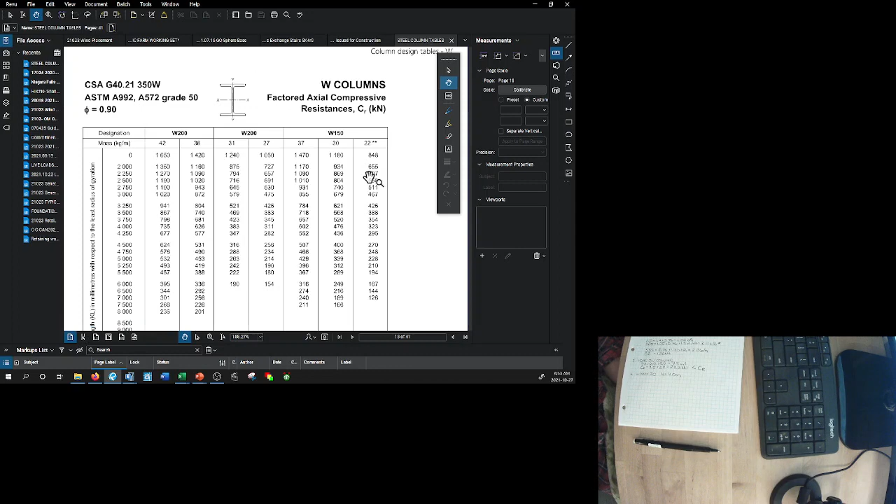If it is super duper ridiculously short, based on just squashing, it can support 1,180 kilonewtons. Do we have a column that's that tall? No. It looks like it starts to lose capacity somewhere around 2 meters tall. And we have a column that is 4 meters tall.

So let's come across here. It looks like 476 kilonewtons is our reduced capacity for this element.

So let's bring this up here. Okay, so for our W150 by 30 with a 4 meters tall, CR equals 476 kilonewtons. Remember, CF was 23.3 kilonewtons, and it is, in fact, less than CR equals 476 kilonewtons.

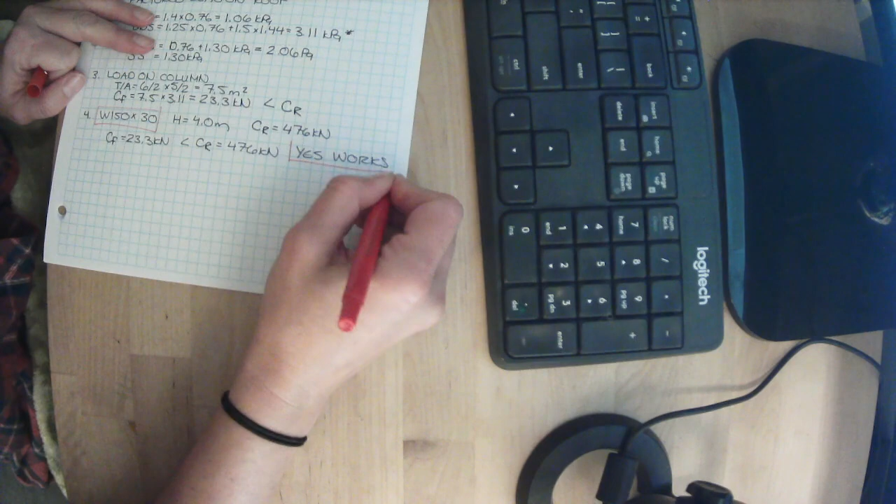So yes, it works. In fact, I will often put a square around something, so if somebody came along and was looking at this work, they could see instantly, out of all of this stuff, because this was all the supporting information, yes, this works.

Well, in fact, remember we said we want the cheapest element we can as long as it works and looks good? This is a lot bigger than it needs to be. It looks like we've got a really small load, and that is a really high capacity. Maybe there's something better. And in fact, they've asked us, what HSS works? What is the cheapest, lightest HSS that will work?

So let's come back to our column tables and let's move forward to the HSSs. And they said square, so we're just going to skip right over the other ones.

Okay, a square HSS, CR. Well, we have a 4 meter tall element. Oh, it looks like these don't work at all. So a 2 inch by 2 inch and a 1.5 inch by 1.5 inch, they don't even have capacity listed if they're 4 meters tall.

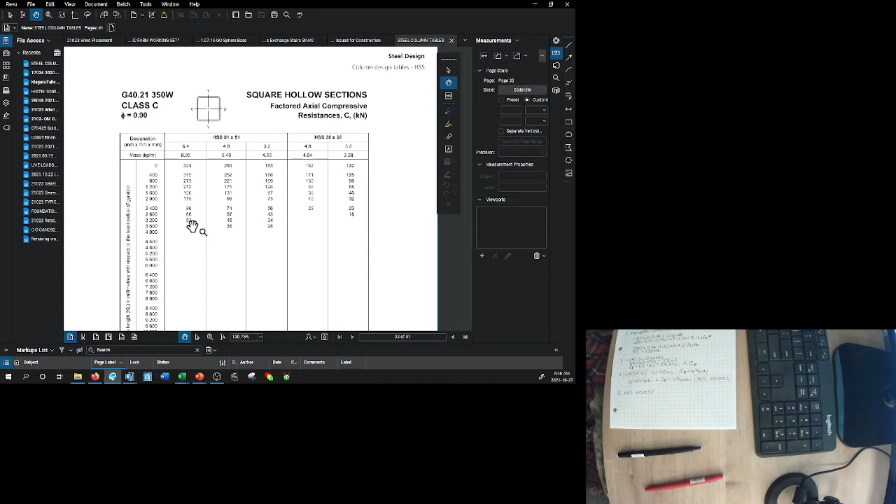That seems like we are past that KL over r, less than 200. So remember, it had to be less than 200. It looks like we're over that. It's just so slender that even if it could take a little bit of load, we don't trust it, and we're going to say no load, not at all.

If we could find a member that works that was lighter, that means it would most likely be cheaper. So let's take a look. It looks like the HSS 64 by 64 by 3.2 has a CR of 45 kilonewtons. That's lighter than the 76 by 76. So that seems like a really good choice.

We have HSS 64 by 64 by 3.2. CR equals, what is it? 45 kilonewtons. And it is greater than CF equals 23.3 kilonewtons. Yes, it works.

So it looks like the cheapest, oh, I'll make that bigger for you guys, sorry about that. It looks like the cheapest HSS that works is a 64 by 64 by 3.2. So we have an answer.

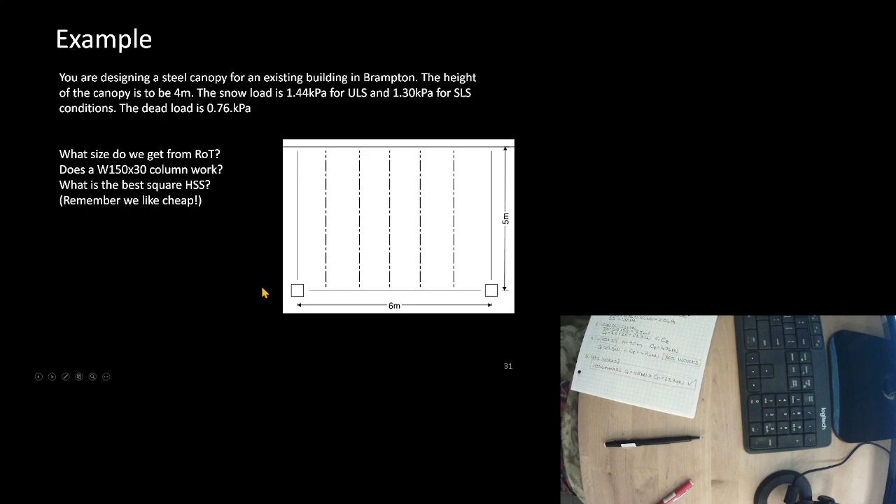For that canopy that we were just looking at, let's bring that up again. For this canopy, the cheapest column that's going to work is an HSS 64 by 64 by 3.2. And we know that its reduced capacity is greater than the factored load applied to it. Here it is worked out.

Okay, let's talk about the same thing, but with bending now. Bending looks more intimidating, and there are a few more things we have to calculate, but the premise is identical to everything we just did for compressive loads. So don't get too overwhelmed because they are very, very, very similar.

So bending resistance, this is MR of a beam. You are not going to have to calculate it. The equation looks like this. In fact, I might even just jump through to the end. I don't want you to have to worry about these calculations or what these equations look like, but I want you to see that they look similar to the column equation. So we have our reduction factor of 0.9. Mu is the buckling moment at the unsupported length. Or do you see this here, this 1 minus stuff? That looks very similar to our lambda.

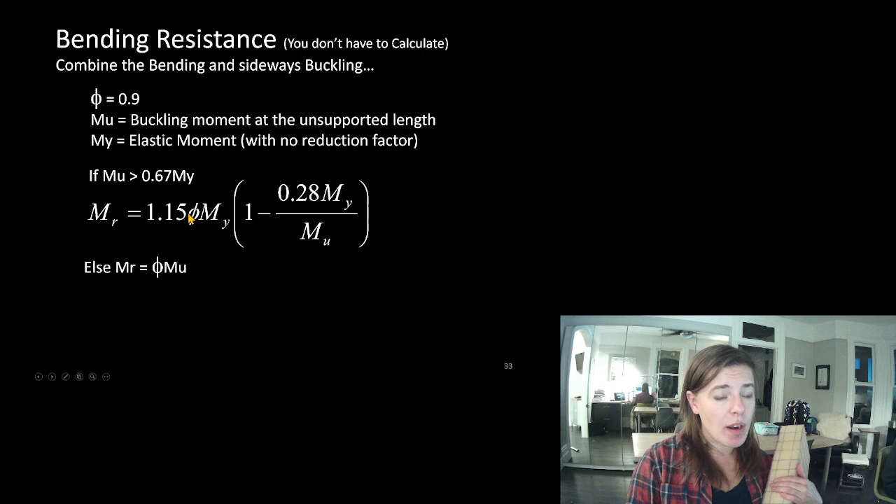My is the elastic moment with no reduction factor. So we've got a reduction factor times My. Well, My is really just our stress times our shape property, and we're going to see that in the next slide here.

Here's the lateral buckling moment. Definitely way beyond what you guys have to calculate. In the graduate program, this calculation does need to be done. It is taxing in its kind of number tracking, that's the hardest part about it. In fact, I recommend most students write a spreadsheet when they do it.

This is about the tendency for the beam to buckle. Now we're thinking bending, how is this buckling? We have our beam here, we're bending it. Oh, only one side buckled. When I did this, the top buckled. When I did this, the bottom buckled. Why does that happen? What side is buckling?

It's always the side that's in compression. If you take a look at this, we're compressing the top and stretching the bottom. It's the side that's in compression that's tending to buckle. So it seems like a lot of the things that impacted columns could be used in deriving our bending equation as well. If it's really short, or something stops it from buckling, we're going to have higher capacities.

Okay, look at this, if I bend it - hey Dave, could I use you for a second? Mm-hmm. Could you ever? Okay, so see how this tends to buckle?

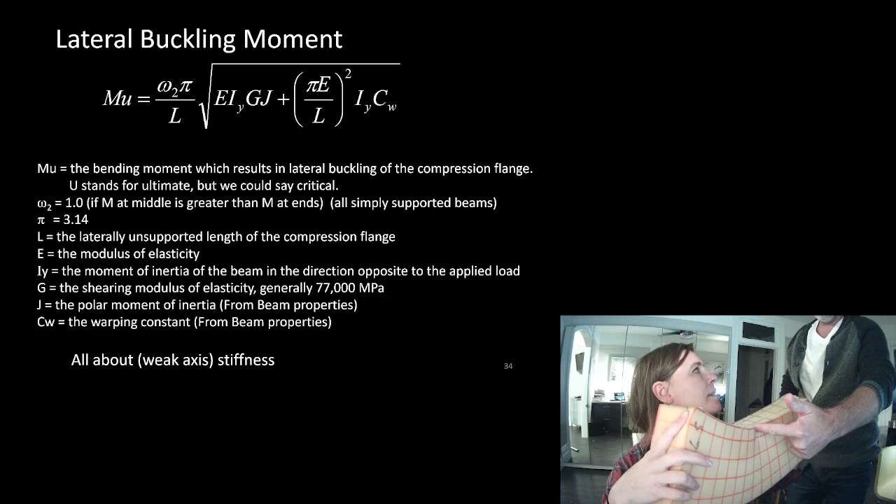Less than an ounce. With very little force, put at that spot where it wanted to buckle, Dave was able to stop it from buckling. In fact, we actually use 2% of the load that's being applied as the thing that would resist buckling. In our column, if we wanted to stop it from buckling, we could have put something right there, or we could have braced it or blocked it and changed its effective length.

For bending, oftentimes we have things connected to the tops of our beams. If this was a purlin or a joist and it was trying to bend, it would be connected to the metal deck. A screw right here into the metal deck - for it to buckle, we'd have to crumple the metal deck, which seems unlikely because, like Dave said, it was almost no force here that stopped it from buckling. If this was a beam and we had joists or purlins connected into it, we would have gaps in between where they were supported, but it wouldn't be the whole full length.

So this length is the laterally unsupported length of the compression flange. Look, L, the laterally unsupported length of the compression flange. We don't care about the tension side because it's not going to try to buckle. The laterally unsupported length isn't its whole length, it is the length in between where it's laterally supported.

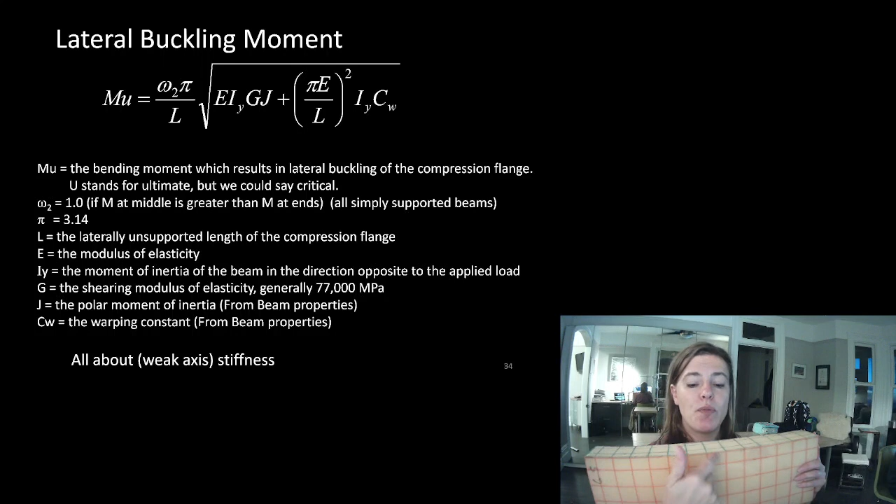When I bend this, its unsupported length on its compression flange is the whole length. When Dave put his finger here, that unsupported length was half of the length. If Dave had stood here and put his fingers in two spots, we would have had a third the length as the unsupported length. So look for things that might be supporting it - remember, deck can laterally support something, another beam can laterally support something.

So if this is the lateral buckling moment, there is nothing about strength in here - IY. Everything else we've looked at has been about the x-axis. What way is this trying to buckle? It's trying to buckle in its weak axis, or the axis that isn't our bending axis. So if we apply a moment about x, it tries to buckle about y. So for buckling, we're worried about IY, we're worried all about weak axis stiffness.

Here's our beam interaction curve. If it is really short, or has an unbraced length that's really short, our moment capacity is just our normal MR equation. Remember, M is stress times our section modulus, or our shape property. So our reduced moment capacity would be our reduction factor times our capacity, or our stress, times our S shape property. If it was a rectangle, we would actually know what that S is.

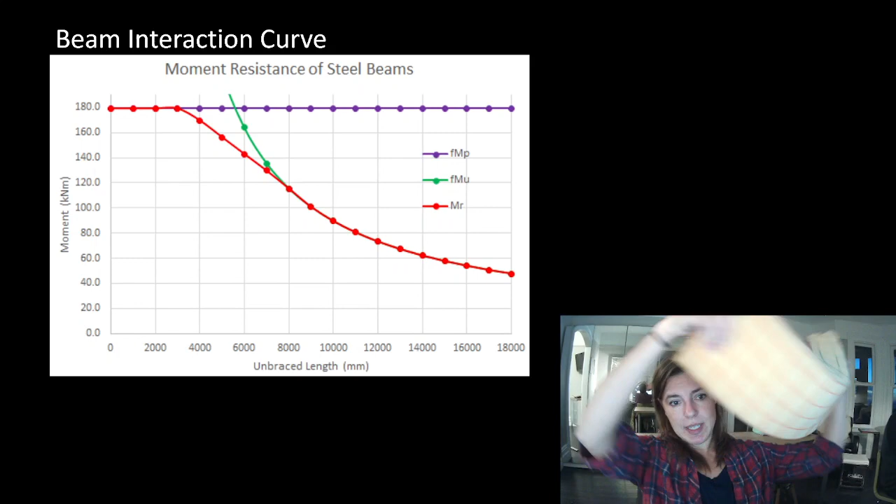Buckling is this green line. So when it's really, really long, it buckles very easily in the top flange, or we call it lateral torsional buckling, because the bottom doesn't buckle, it actually has a tendency to twist the beam. Look at that, it actually tries to twist it. So we call it lateral because it's moving sideways, torsional because it tries to twist, buckling.

In between a really short element and a really long element, we have a zone where there's some combination of strength and buckling governing the design.

Shear. Now, don't worry too much about that. I want you to understand where it's coming from, but you're going to get the same charts that you did for the columns.

For shear, we have kind of a funny stress distribution. Look at this, we get the most stress at the midpoint and almost nothing in the flanges of our beam. So what we do is take the average of the low point and high point, and completely neglect the flanges of our top and bottom chord. So we say our shear stress distribution is about two thirds of our peak stress.

So if we say that this is at capacity, we actually lower our capacity quite a bit. We say the VR is our reduction factor times the area of our web, because we ignore our flanges, so it's just this area right here, times Fs, where Fs is the ultimate shear stress. Now, I'm saying that it's about two thirds of Fy, or two thirds of our 345 MPa.

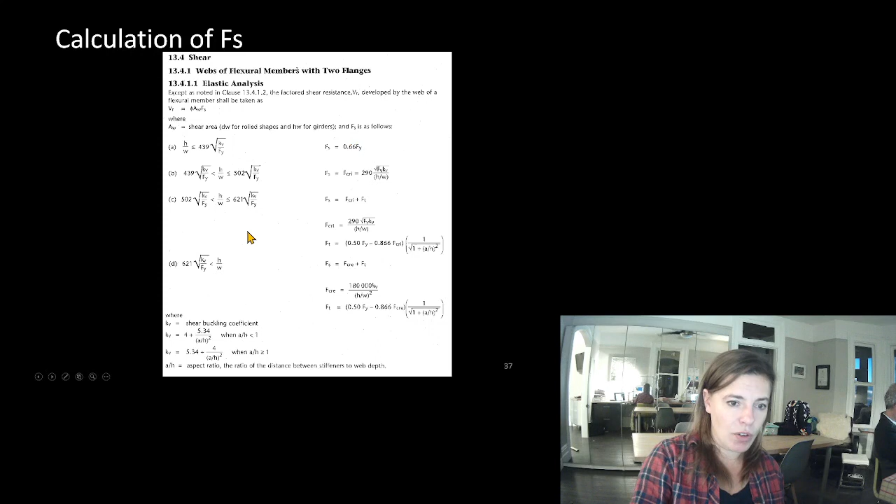So the total capacity for moment and shear for a steel beam: this is our equation for bending, this is our equation for shear. Bending has a component that is about its depth, because that's its shape property, and a component about its stiffness and its weak axes, which is about its buckling tendency. And shear is all about the area of the web.

All right, oh, I didn't hide these, which makes it less fun to talk through and go through it. But we want to know the lightest and cheapest beam that works for MF equals 195 kilonewton meters.

That has an unbraced length of 3.45 meters. That doesn't tell us how long this beam is. This beam could be 20 meters long, we don't know. We just know what its unbraced length is. So find us the lightest, cheapest beam that works. I have uploaded for you beam bending tables.

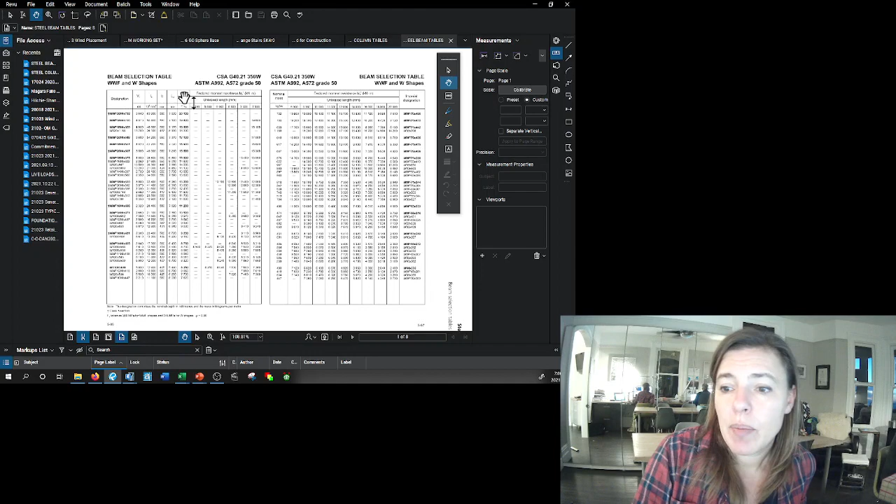Let me open that up for you. All right, steel beam tables. And we have something with an MF of 195 kilonewton meters. We don't know what beam they want us to check, but they want us to find the cheapest one that works.

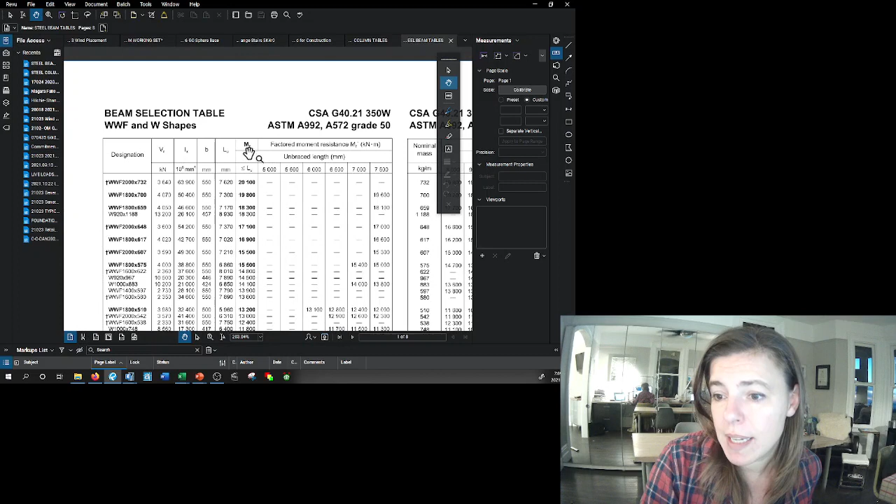They told us that it has an unbraced length that's pretty darn close to 3.5 meters. We could use less than 3.5 meters, but let's get started and find a range of beams that work. Well, this looks like for anything less than 5 meters, we've got massive moment capacities. So look, MR, these are our shapes. They've told us that this is a reduced load.

We're still talking at 4 meters of things with really, really high capacities. So maybe we need smaller beams than this. We're getting closer to the range we're talking about, but we had a really lightly loaded beam, 195 kilonewton meters. All right, let's come in here.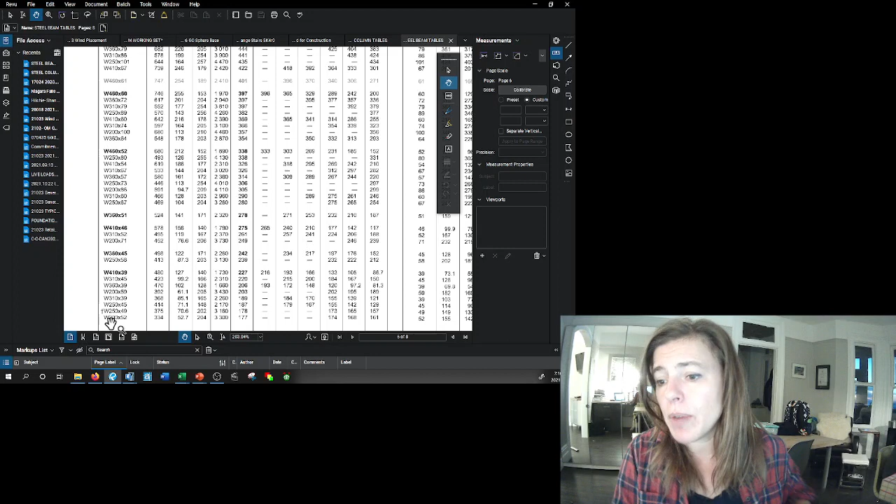Oh, all right, we were close to 3.5 meters in our unbraced length. It looks like down here, our first element has less capacity than we need. So W250 by 52 doesn't work. We need something with at least 195 kilonewton meters of capacity.

So let's go up this chart here. There was our 4 meter chart. Here's our 4 meters—or no, sorry, 3.5. 3.5, ooh, look at this. 202, let's come across, a 200 by 59 works. Great, problem solved, we found our beam. A W200 by 59 works.

We're very happy, but they said the cheapest, and we know the cheapest has to do with weight. What if there's a beam that works that weighs less than about 59 kilograms per meter? We should check that out. All right, what's the next one that works?

232 kilonewton meters of capacity. A W250 by 58 works, and it's a little bit lighter. So we've got a beam that is one step cheaper now. Let's look a little bit more.

Let's come up here. Ooh, 197. 197 is greater than 195. Ooh, a W360 by 45. That's quite a bit cheaper. Well, maybe that one is a good choice.

Let's go up a little more. Well, this works. A W310 by 52. But it's heavier again. That W360 by 45 seems like a really good choice.

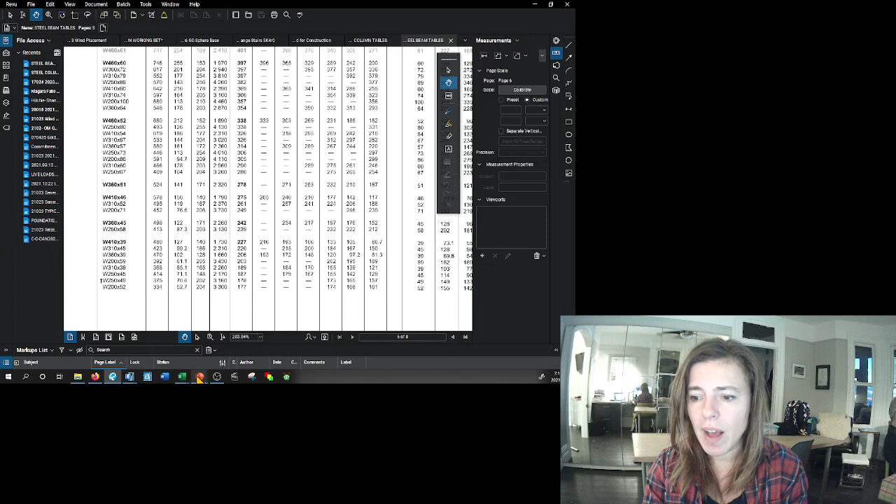At this point, it looks like absolutely everything is heavier than the beam we just looked at. So it seems like a W360 by 45 is going to be the lightest one out of the members that works.

Once we know that it works, we could actually interpolate and find out what its capacity is at our 3.45 meters. Because remember, it was 197 at 3.5 meters, but we're a little bit shorter than that. We can figure out what it is. We'd be interpolating between 197 and 217, which was the value at 3 meters long. So we could interpolate to find 199.

Often though, I would probably just say MR of 197 at the 3.5 meter unbraced length would be fine. I will be explicit to you if you need to interpolate. If I tell you to find the value, or if I say interpolate to find the results, I am telling you that writing the slightly more conservative value isn't enough. I want you to interpolate.

On the same chart, there's a child crying. Do you have it? Thank you.

Well, you can see the sun is coming up in the background. You can see Lake Ontario out there, just a tiny little bit. That's the clouds over the lake out there.

On these same charts, look at this. VR, the capacity, also lists the I of the element. That's weird. We know that might be helpful for something. And with beams, we really care about deflection and how much these things move. So maybe there's more that we can do with these charts.

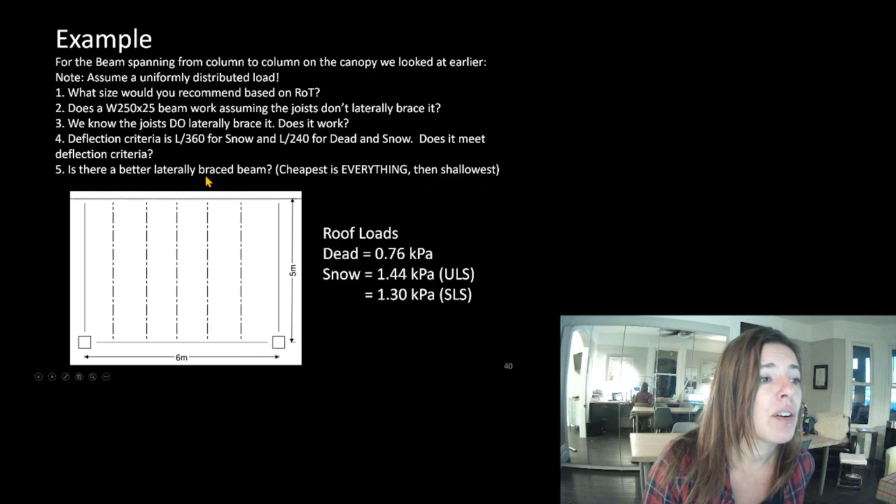Is there a better laterally braced beam? Remember, cheapest is everything, and then you could worry about the shallowest. Okay, let's go through this calculation.

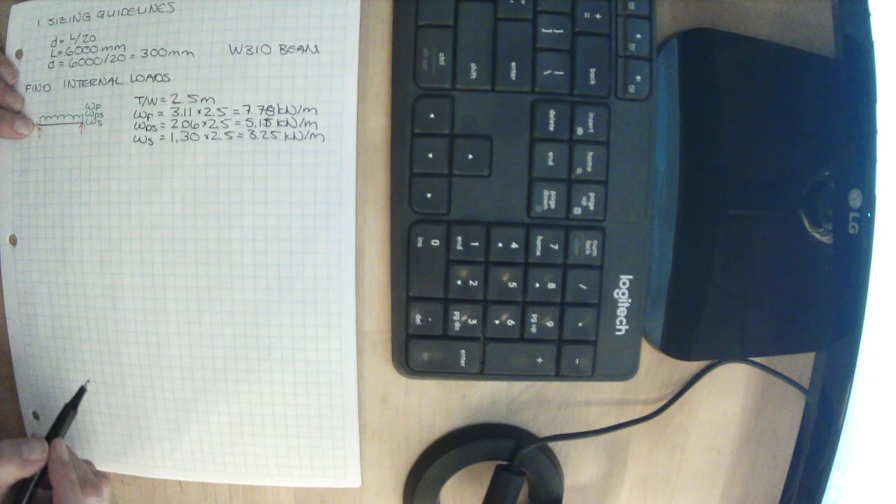So we have all of our serviceability loads and factored loads acting on this beam. We know this is a simply supported, uniformly distributed load beam situation. We could manually do method of sections and cut this to find the internal shear force and moment at any part in its length, but I've also shown you we have beam charts.

R1F equals R2F equals VF max is WL divided by 2 - we're talking about our factored loads here because we want VF. So WF L divided by 2 equals 7.78 kilonewtons per meter, this beam is 6 meters long, times 6, divided by 2. If we plug that into our calculator, we get 23.3 kilonewtons.

That was the load on our column. Interesting - half of the load on the beam goes to one end, half goes to the other. The reaction at the end of this beam, this red line, is our column - it's what the column has to do. This column is supporting this beam. If the reaction at this beam is 23.3 kilonewtons, the load the column's picking up is 23.3 kilonewtons. So this matches what we probably would have inferred.

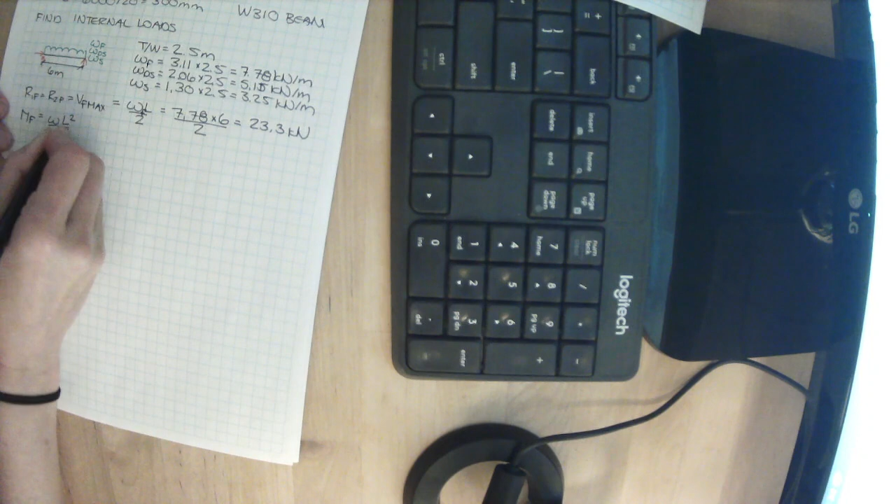MF equals WL squared divided by 8. Remember we figured that out - this was at the ends, and this is at midpoint, so this is at the midpoint of our beam. We have 7.78 times 6 meters squared divided by 8. Plugging that into our calculator, we get 35 kilonewton meters. So we need a beam that has the reduced capacity to support 23.3 kilonewtons of shear and 35 kilonewton meters of moment.

Now there's also some information about deflection here. We want to know what the max deflections are - the max allowable deflection. Actually, we want to know what the actual deflection is.

To know that - I'm trying to figure out the best way to word this for you, because we're going to merge two parts of the solution here. We know we need a beam that is 23.3 kilonewtons of shear, 35 kilonewton meters of moment. We also need a beam...

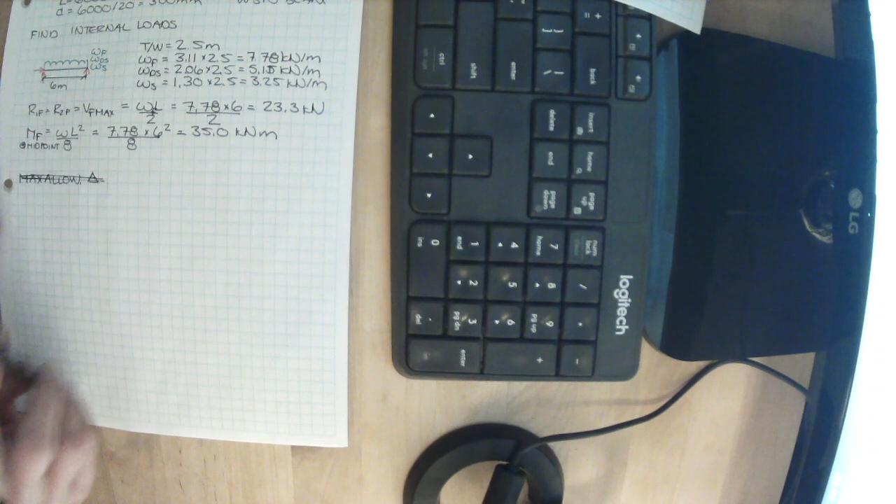Guys, Mommy's recording a lecture. Okay? Malcolm, can you tell Duncan no? Thank you, buddy, and remind Daddy. Hey buddy, I love you. Hi Mom, hi cutie patootie. Okay, Mommy's going to be almost done. I'm gonna hug you, okay, quick. Thank you, I love your hugs so much. I'll come in and give you all kinds of snugs in a second. Okay, sorry about that everyone, but it is life with small kids during the recovery from a pandemic.

Okay, we have the actual deflection, and we know that the actual deflection is 5WL^4 divided by 384EI. We know that - sorry everyone, that door should be shut, I apologize - this is the actual deflection.

We know that we have a max allowable deflection of L divided by 240 for dead plus snow, and L divided by 360 for just snow by itself.

Well, we know the criteria we've been given, and we know what L is. 5 is a constant. W is our various load, depending on whether we're talking dead and snow or snow by itself. L, we know. E, we know. The only thing we don't know is I, and it's a shape property. We want to find a member that works. Why not look for a member that has the I that works?

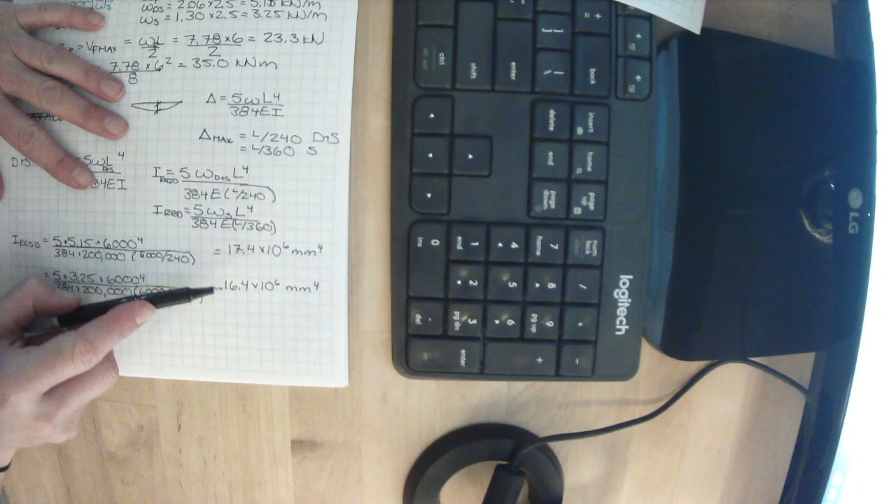We need a beam that has an I greater than both of these values. Well, if it's greater than this, it's by default greater than this.

Our beam needs a VR greater than 23.3 kilonewtons. It needs an MR greater than 35 kilonewton meters, and an I actual greater than 17.4 times 10 to the 6 millimeters to the 4th. This is our criteria - all of this distills down to say we need a beam that meets this criteria.

Luckily, we have some handy charts that list VR, MR, and the I of various beams with unsupported lengths. The first thing they asked us was, does a W... So I'm going to rewrite this for a second.

We're going to write VF equals 23.3 kilonewtons. MF equals 35 kilonewton meters, and I required equals 17.4 times 10 to the 6 millimeters to the 4th. The first thing they've asked us is, does a W250 by 25 with an LU of 6 meters work? And then they've asked us, does a W250 by 25 with an LU of 1 meter work?

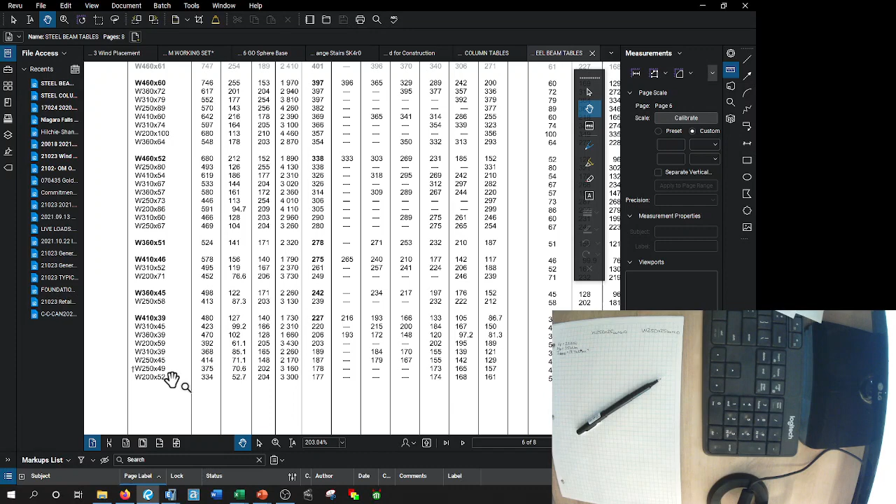All right, let's go to the W250 by 25. That's on the next page. All right, where are we? W250 by 25. Here we go. Okay, so we're talking about something in this range. Oh, it jumps pages, which is a bit of a pain in the butt.

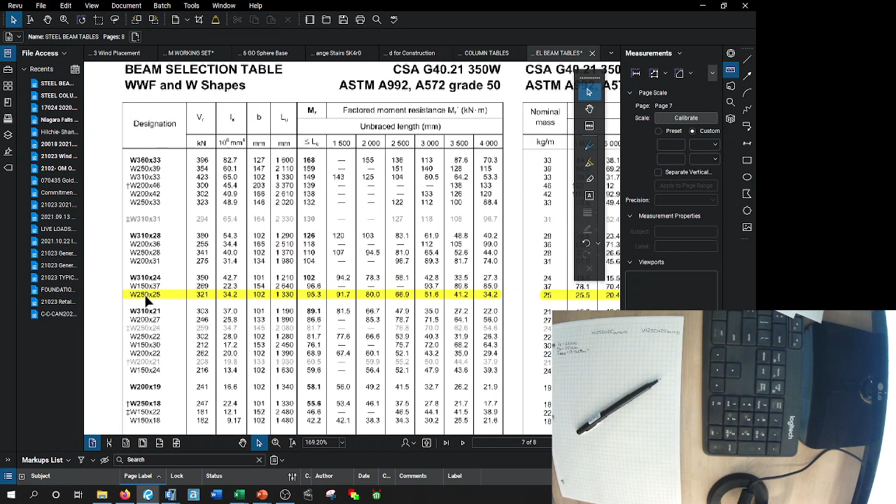Okay, so we're talking about this line here. The first one, they said, let's talk about it at 6 meters. Well, MR is 20.4 kilonewton meters, VR is 321 kilonewtons, and I is 34.2 times 10 to the 6 millimeters to the 4th.

So we can write that out. VR is 321 kilonewtons. Our MR was 20.4 kilonewton meters, and the I actual was 34.2 times 10 to the 6 millimeters to the 4th. That works, and that works. That doesn't work. So a big old no for that beam.

I'm going to make this bigger again for you. So I've just written out everything I just looked up for this beam. Let's look up what the values are when it's 1 meter unbraced length. So the length of the beam hasn't changed, just its unbraced length. So 1 meter is less than 1.5 meters, so it says that anything less than 1.5 meters, we get to use this. It's basically saying it's fully braced.

So a W250 by 25 for an LU of 1 meter has an MR of 95.3 kilonewton meters. VR doesn't change, and the I actual doesn't change. So we still have, let me make it big. All right, we have 321 kilonewtons of capacity. We have 95.3 kilonewton meters of capacity for moment, and our I actual of 34.2 times 10 to the 6 millimeters to the 4th. Yes, yes, yes.

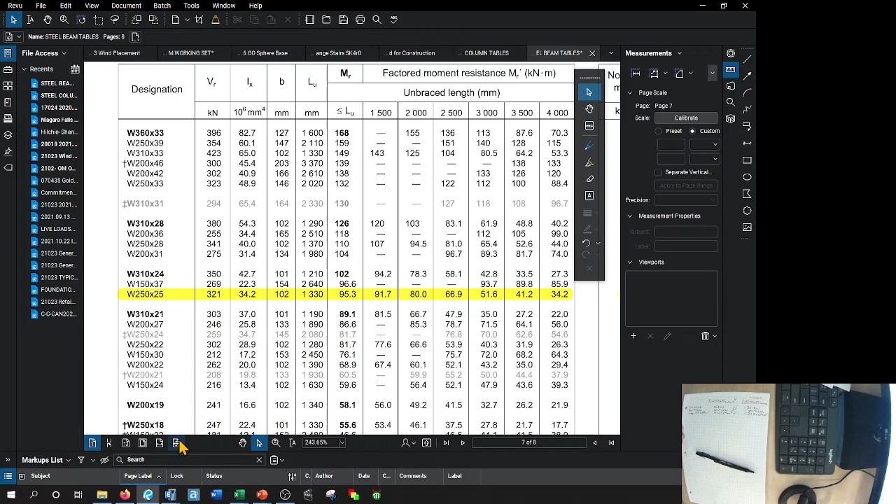Let's take a look at our chart here. We need all of the things to work for us. So let's see what we get here. It's got to be cheaper than 25. It's got to weigh less than 25 kilograms per meter. Okay, the 310 by 24 does.

Well, let's maybe start from the bottom. The W150 by 13, it doesn't have enough moment. The 150 by 14 doesn't. We needed something that has at least 35 kilonewton meters of moment. Okay, well the W200 by 15 does, 39.4 is greater than 35. The shear works. Oh, look, I isn't enough. We need a higher I here.

Okay, well, it looks like this beam doesn't work and this beam doesn't work. We've got a W250 by 18 here. Moment works, 55.6. Shear works, 247. And I of 22.4. Okay, for a W, let me make this bigger.

For a W250 by 18, VF equals 23.3, which is less than VR of 247 kilonewtons. MF equals 35 is less than our 56, the MR was 55.6 kilonewton meters, and I required of 17.4 times 10 to the 6 is less than our I actual of, what's our I actual? At 22.4 times 10 to the 6 millimeters to the 4th.

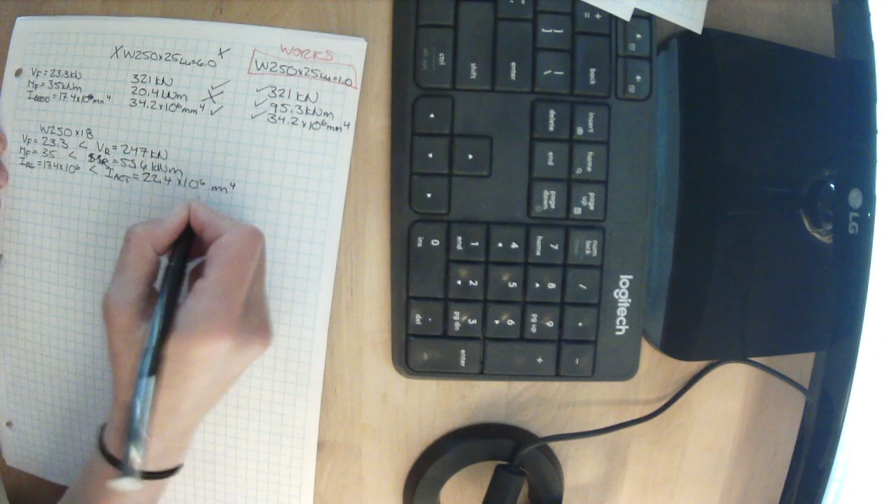So, they have suggested a beam, but we actually have one that's cheaper that works. We have a W250 by 18. So we can go back to that design team and say, hey, we think we found an even better solution for you. Maybe architecturally you had one that you really wanted to use, but if not, we have one here for you that we think is even cheaper as long as it meets your design criteria.

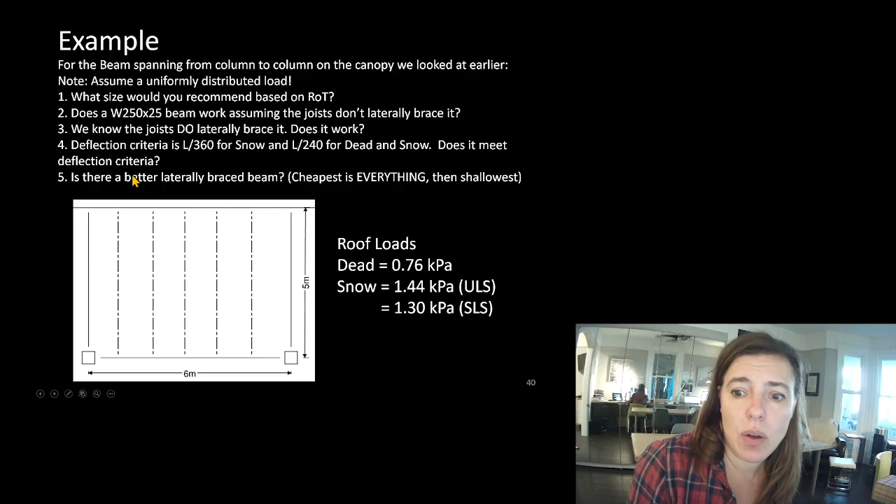Okay, so that is worked out here for you. I've pulled up the slides so that you can actually look at it as well.

So today's tip: plane sections remain plane, bending stress and strain are similar to axial stress and strain, depth and length are the biggest impact on design. Tension resistance is all about stress, compression resistance is a combo of stress and buckling, bending resistance is a combo of bending stress and lateral buckling, shear resistance is all about the web area.

Bending deflection can be calculated. So we can calculate TF or CF based on the tributary area. We have beam charts to find MF and VF and deflection based on loads. And we can look up TR, CR, MR, VR, and I required. We can size all our steel columns and all our steel beams. So we have answers. If we were doing a steel beam, we could go out in the world and design it now. I mean, within reason.